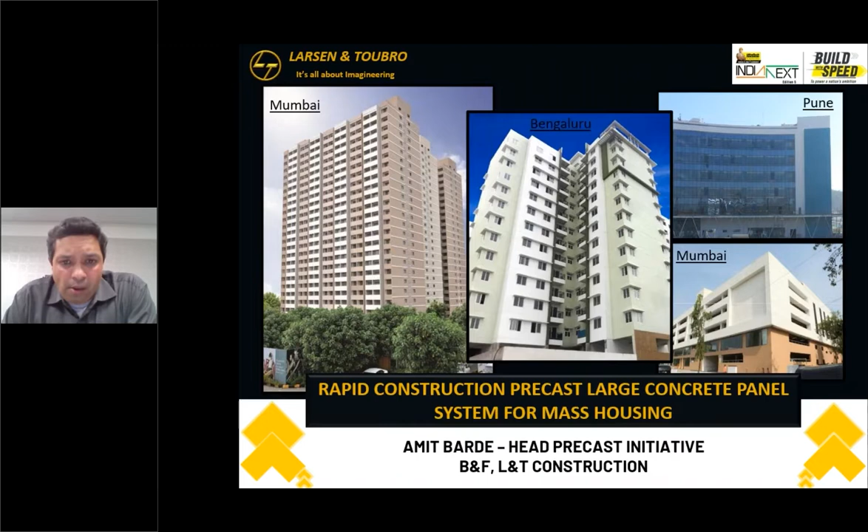Just a little bit about the company - all the numbers are there, I'm not going to spend time on that, but what we take pride in is being a professionally managed company and one of the most innovative companies. We call it Imagineering, not just engineering. There are various verticals amongst the company. I specifically come from the buildings and factories group, where the focus is on buildings, and more on residential construction.

Not a lot of people actually know L&T in the residential space. Usually it's all infra and huge projects, but we do a lot of residential work, usually the largest and the tallest, as the company's name suggests. A lot of projects you see, more than 250-300 meters, are going up in Mumbai in the residential space. For mass housing, if you see the project on your left, there are 6 tall buildings - it's like a city on its own. That's the kind of projects we're looking at. On the commercial and public space side, we have Statue of Unity, one of the recent projects, and the T2 airport was built in that commercial space.

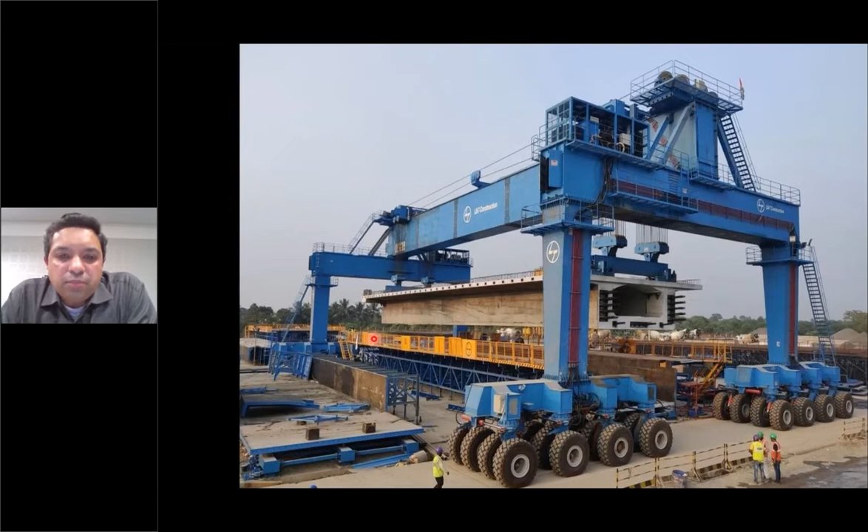If we come to precast specifically, the Narendra Modi Stadium at Motera was total precast, one of the very recent buildings in the precast space. And now we are building the high-speed railway - this is all going in precast. What you see in the picture is one of the most indigenous and unique systems where we are lifting 40-meter long girders for the high-speed railway. The entire assembly is automatically controlled between those four columns that you see with the wheels, and all built in India - none of that was coming from outside.

This is a Cognizant Technology building in Pune. This is one of the first buildings that we did in precast, around the 2011-12 timeframe.

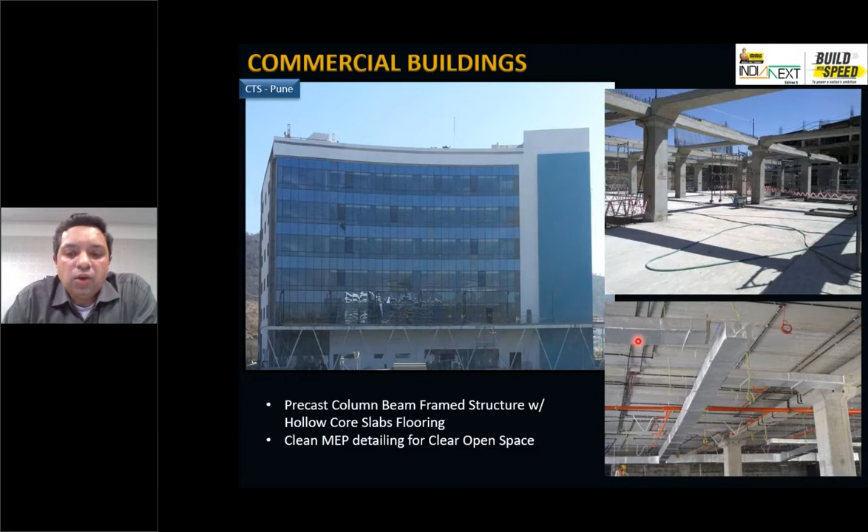Commercial building, total precast, columns and beams, and then hollow core, usually 8 to 10 meter grids. Usually in that hollow core system, a lot of questions come on MEP coordination. If you put in that time and do the coordination well during execution, we did not have a single complaint or query from the MEP contractor on this job. This was one of the first jobs.

This again is a project in Mumbai, the IKEA warehouse in Navi Mumbai. Hollow core slabs we've done before, but two unique things here: it's a hybrid structure with a steel frame, and the floors were put quickly using the hollow core system. It's somewhat difficult to gauge the size, but this is one of the deepest hollow core elements used in India's building sector - a 400 deep hollow core element, with a span of about 16 meters. The load is about warehouse load of 750 kg per square meter.

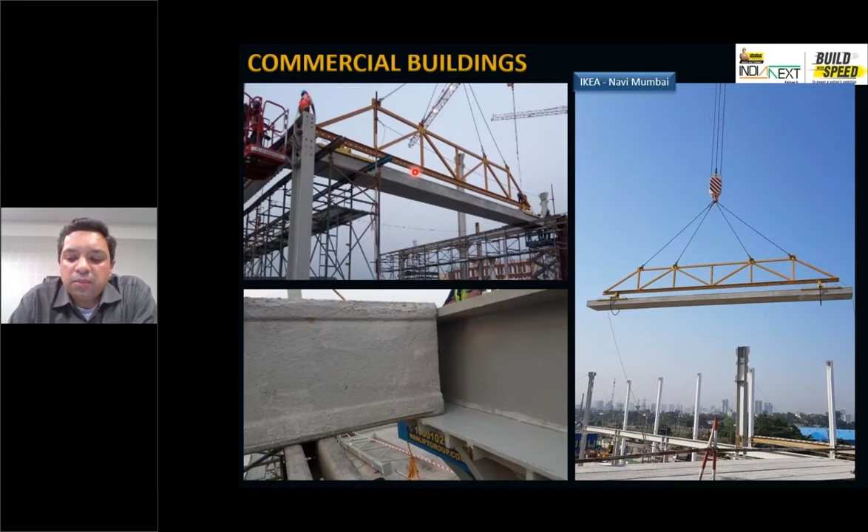So largest load and largest span for that hollow core. The biggest advantage: steel structure is ready, slab is put, no shoring from below, and then just the concreting is done to finish that floor - almost about 50% improvement in productivity. If you ever visit that store and walk on the showroom floor where all the furniture and rooms are set up, you are walking on those hollow core slabs.

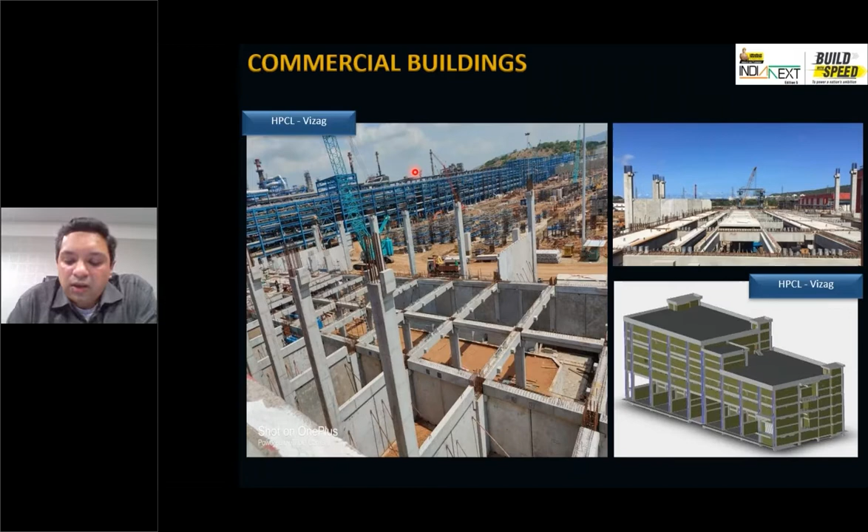This is one of the jobs now ongoing in Vizag, where we are doing a total precast substation for a refinery job. That substation is like the heart of that refinery. The refinery project itself is anywhere between 15,000 to 18,000 crore. The substation is a 35-40 crore structure, but without it the entire refinery cannot survive or operate. So we took the call to make it precast, again for that speed so they can start operating the refinery.

This is an office building in Hyderabad. When the building started, the architect had the vision of these C-shaped panels and bands, and this was conceived in block work. After starting the building, we took the call saying it's just too much block work to do plaster, and all these bands and the exterior facade were converted into a precast system.

Why I'm showing this is, even for your competition now, this is the theme we are saying: speed. Wherever that speed demand is, we are trying to make sure we move it to the factory, move it offsite, make it industrialized, and reduce site work as much as possible. So in all these key projects, at the heart of it, you're going to feel these 3-4 things, which are the need. I'm not doing precast just to push precast - this is coming from an inherent need of the company or the projects we do.

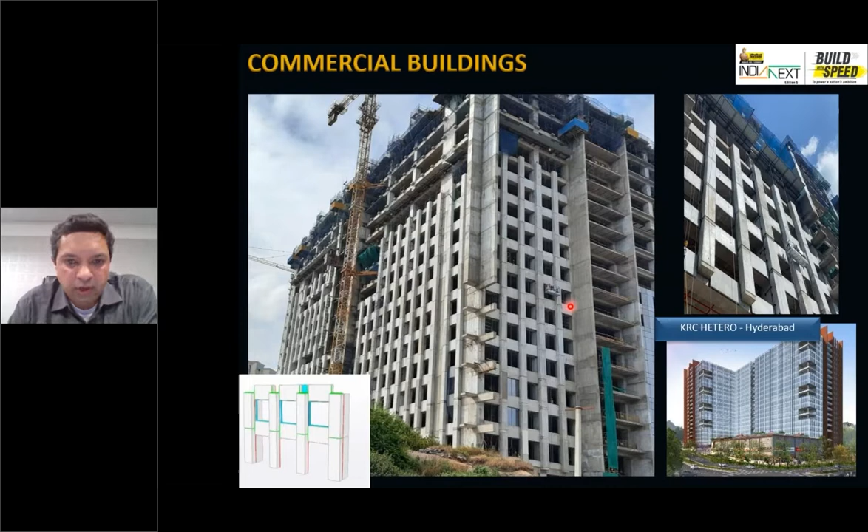Now this is a new proposal, not a working project, but what we call ultra rapid. Same building as your Hyderabad building but in Mumbai - now this is a 27-story tall building, and you have all this block work wall. It's right next to Powai Lake, so you get a lot of rain and everything, so doing block work is going to be a challenge. Even if you do really well with block work and plaster, there are just too many vulnerabilities to get leakage, or to get the work done faster.

So what we said is we will do precast panels, and we proposed welded connections. Usually my precast panel will take 2-3 days to finish - you erect the panel, do the jointing, do wet concreting.

Here with the welded connections, because I have a steel structure, the mock-up panel itself was attached to the structure in just under 30 minutes. That's the speed, that's the ultra rapid approach we are looking at - erected, connections welded, and ready for the sealant and finishing activity. That's the crux of why we are trying to look at these precast options.

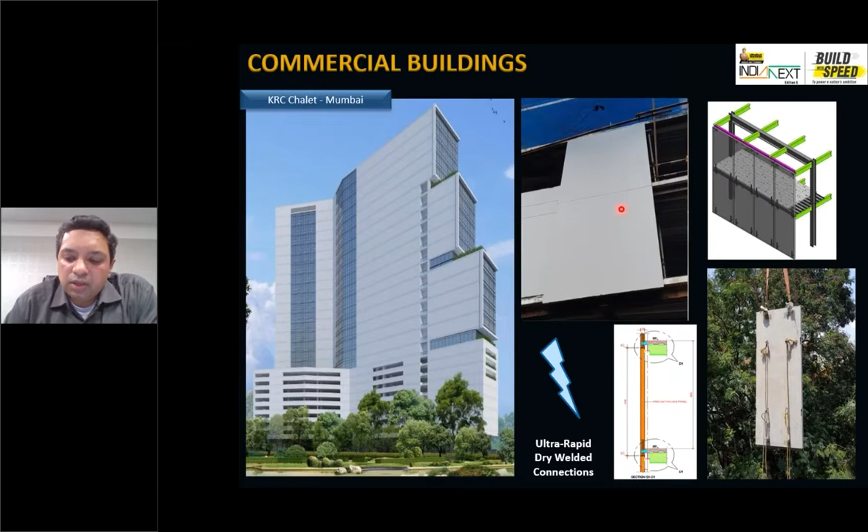Now coming back to residential, I think from this point onward pretty much everything will be discussed around residential, and more for the mass housing scope. Mass housing is not new to us - a lot of projects over the last 15-20 years. These are all conventional system projects, but why I wanted to put it is that's the experience under our belt to know what the residential client wants, to know what the residential construction beast is.

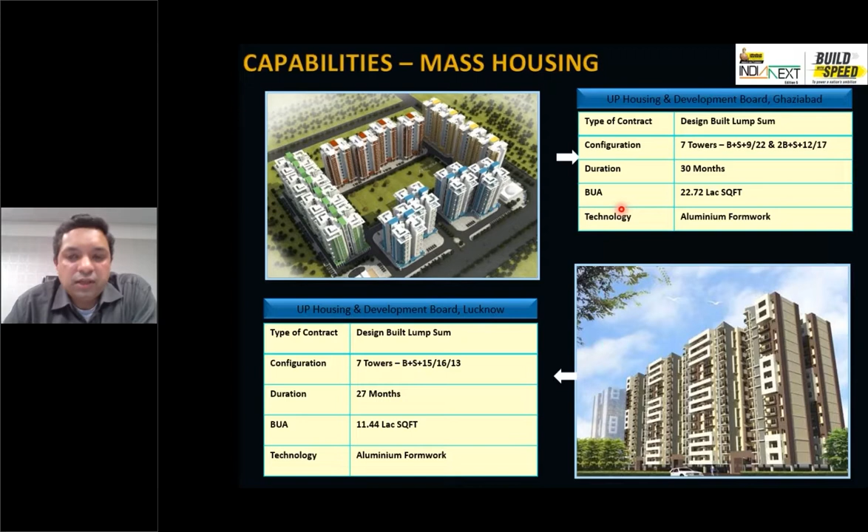Commercial is a very different construction system - there you are only dealing with one client. Here you have several flats, and each flat has probably 4 or 5 people living in it, if not 4, at least 3. So that many number of clients you are looking at. Government projects, private projects, a bunch of experience under our belt - high rise, mid rise, 20 buildings to even 100 buildings.

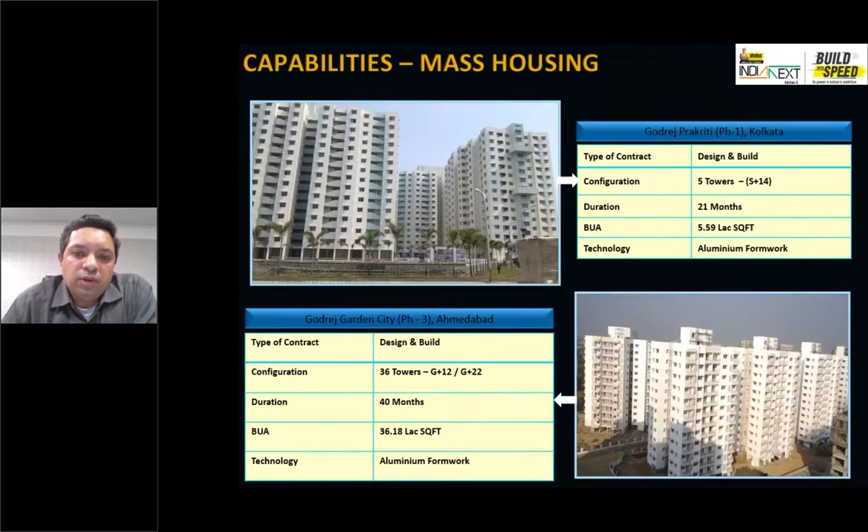There is a social connect, there is a social pride in that, so that's what they want - they want to have that pride. It's of course a long-term investment, they want it to be there - 50 years, why 50 years? We get the question of 80 years, 100 years, why not? So they want that to be there.

They want something low maintenance. They want something where electricity consumption will be less. There won't be any maintenance issues. They want something that is acceptable by everybody, where if need comes, they should be able to sell it off easily and get that return.

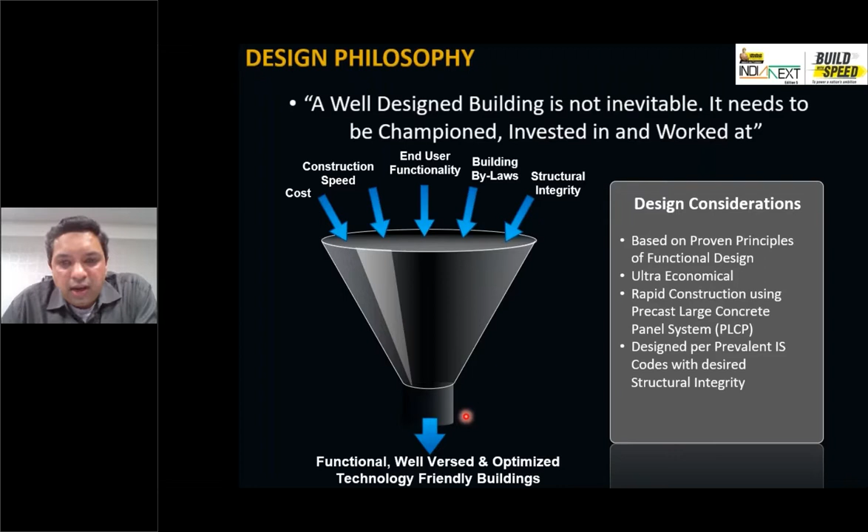It will be automatically accepted by your end user. And how you do it is not just one entity, right? It's not going to come that I do the structural design and your building is ready. You have to start from your foundation, your services, the coordination, where each pipe is going. This is where the beam comes into picture, saying my plinth beam levels are checked so my rainwater pipe is not going to hit it. These are minute things where over the years this was done as, for lack of a better word, jugaad - kuch to kar lenge and then we'll see. But we are not there, right? We want a functional design, we want everything right on the paper.

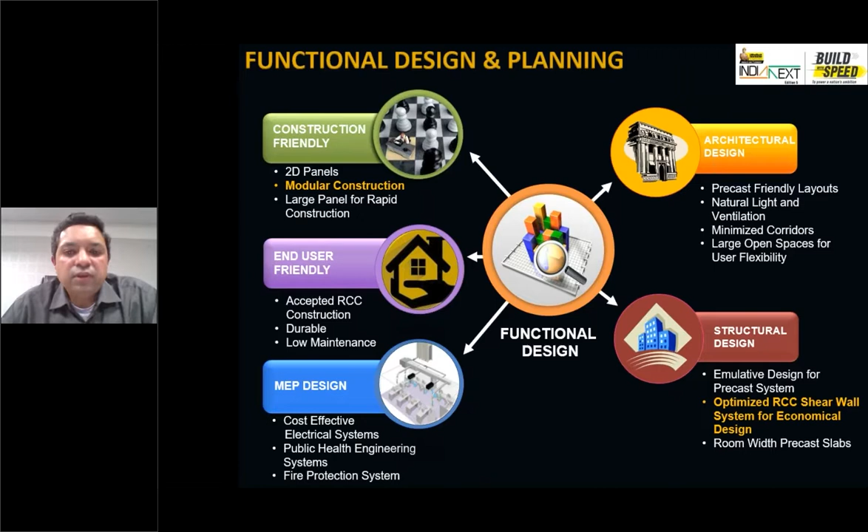Lastly, maybe the last 10 minutes, I'll spend on that ongoing project - it's one of the largest projects for the residential BU, more than 5,000 crore worth that we took up in precast for the CIDCO housing project. We are about a year into the project, so we're still building, we're still doing. I don't want to spend a lot of time there, but at least to give you a flavor, maybe next couple of months we can get into a lot more detail.

And then how we have adopted digitalization, that I mentioned in the start as well - this is how the technology is adopted and how we are using digitalization to make it even more effective, even more efficient. And lastly, maybe 2 minutes, I'm just going to say way forward where this precast technology could go, or what the outside world is doing, whether we'll be able to match it, do we really need it, why we need it, and how we go about it, right?

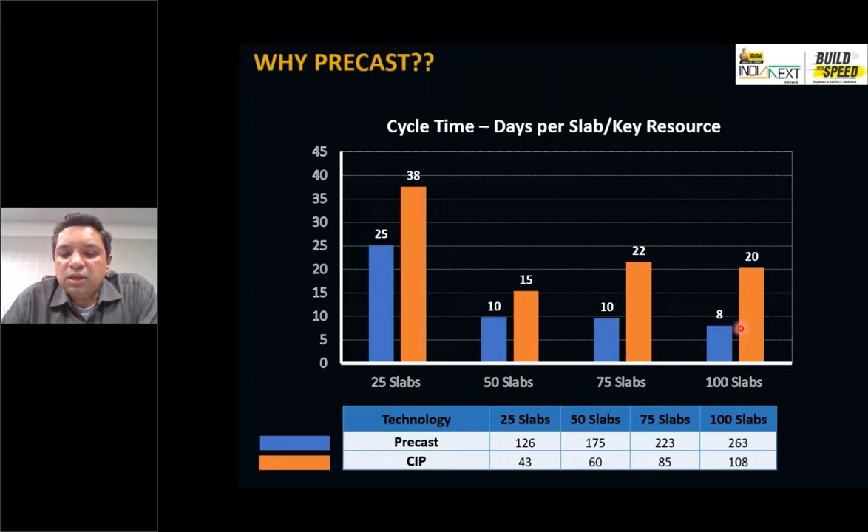The other thing, if I do the same project again, whatever we estimate - usually if you look at aluminum formwork, we want fewer people at site, fewer resources so that my risk is lesser. One of the biggest risks in construction today, especially residential, is having your workforce at site. If you remember, when COVID waves hit, the biggest challenge was getting people back - even media was talking about it. So if I have fewer people doing that same work, my risks are less.

The challenges are less. If you look at that entire activity in aluminum formwork, per cubic meter of concrete, I need about 5.5 man days. So assume I need 5 people there.

For the same thing in precast - both conventional precast and automatic precast - this is what we are doing now. We can even go to fully automatic, what the global industry usually does, and it will improve even further. But I've kept it at where India is right now, what we are doing at best. I'm looking at 2.5 man days, so it's about half. But that's not the real story - out of these 2.5 man days, I need about 1 for production and only 1.5 at site.

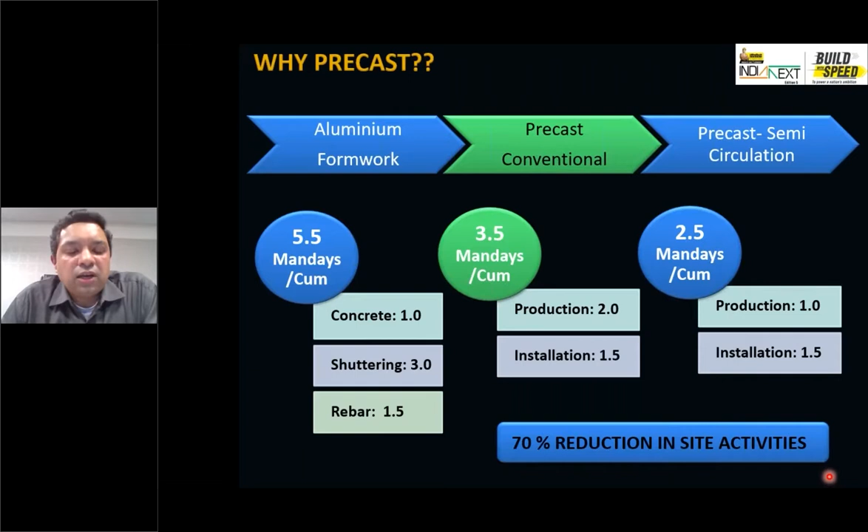If you compare site activities for precast and conventional construction, there's about a 70% reduction in site requirement of people. This is where I'm covering my risk—I don't have to worry as much about having the workforce at site. Workforce at factory is a very different ball game. We have a much higher retention ratio at factory because they're working in a controlled environment, at ground level, covered shed. Whoever is there, they always stay.

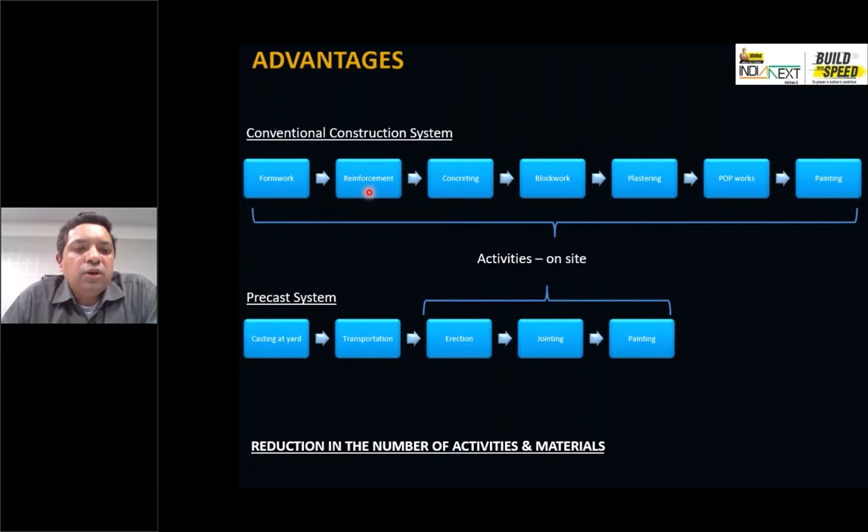In a nutshell, at site with conventional construction, if you look at what these 5 or 3 people are doing, they build the formwork, put the reinforcement, do concreting, block work, plastering, POP, painting. Since we took up the aluminum formwork system, we've completely avoided that work—this is where you need maximum workforce, the block work, plastering, leveling and everything. So instead we are doing this shear wall system using aluminum. Even forgetting precast for now, aluminum became popular because these activities were removed. I'll talk about that more later.

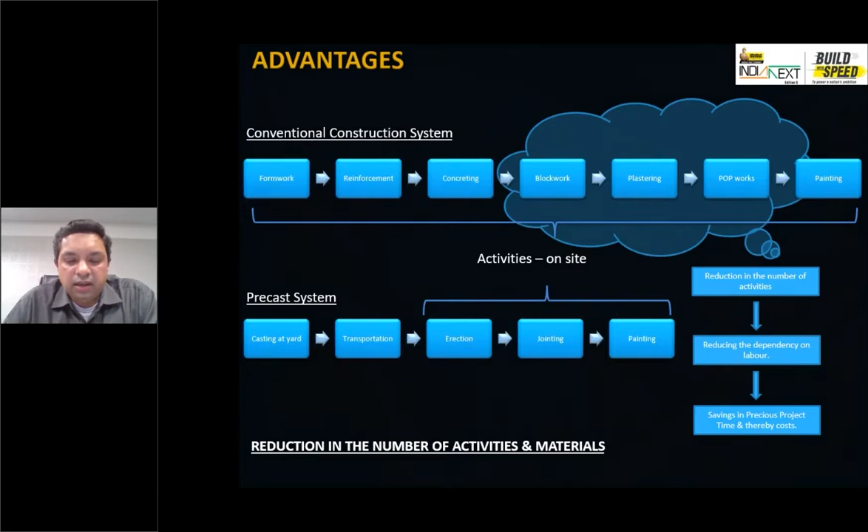Now in precast, this still takes a lot of time—that 5.5 people per cubic meter we're talking about—but we're taking it off site and doing everything in the factory, finishing it there, then bringing it to install. That's the idea, and where we'll adopt it is projects like this.

This is our AP housing project, 1 lakh houses straight. Same buildings—this is basically what the housing demand is. We keep talking about 12 crore houses everywhere, but here's a single project in nearby 3-4 plots with demand for 1 lakh similar houses, ground plus 4-story tall buildings. How do we solve that challenge?

We just look outside, at our neighbors. We are not the first to go through this challenge of social or mass housing. Singapore has done it, Shanghai has done it, Tokyo has done it, Hong Kong has done it—all these countries have done it. These are our neighbors with similar setups, similar situations. How long did they take? About 20-25 years, and we are looking at doing it in 7, 10, maybe 15 years—a drastically smaller time period. This is where speed comes into picture.

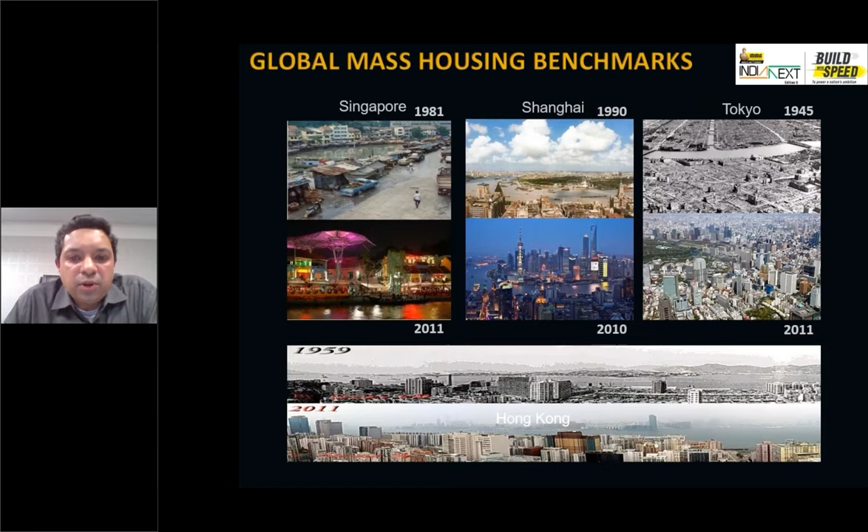How will the speed come? Using technology. Have we not adopted technology? In all other construction aspects we have, right? I am from Mumbai. If you're in Mumbai today, we are building the metro all over Mumbai, the coastal road, the Trans Harbour link connecting Navi Mumbai to Mumbai, the high-speed railway—some of the latest and greatest projects using the greatest technologies globally are operating in Mumbai at the same time, they cannot get better than that. But still, if you come to residential construction, we are lagging.

We have to do something, and this is what we are doing. What our neighbors are doing, the only answer that comes for all these countries, is industrialization and mechanization. Is anybody now stitching their own shirts? No, we are not stitching our own shirts, we are not stitching our own shoes. There are factory made products in that range, and we are very well adapted to do that.

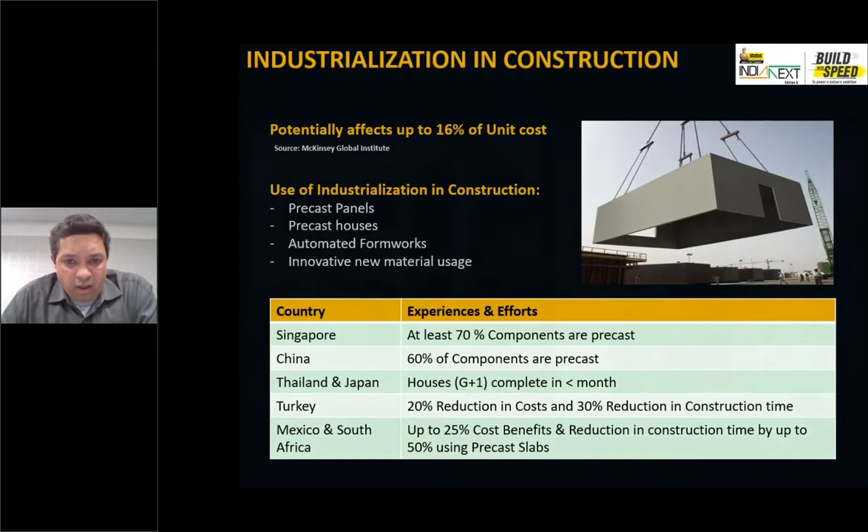This is where residential construction has to go. There are set standards, set standard units, especially for mass housing, where we are looking at large volumes for whatever functional requirement, and you put it in the factory, make it like a car, make it like a shirt, and then construct. That is one of the biggest driving points. If nothing else about technology, if you want to take one thing home today, it's industrialization and mechanization—that's how we get speed, that's how we get the answer to our solution.

If the slab is done, your developer says, okay, slab is done, now give me my money, but the building is only done 50%, and that's the industry norm. But block by block, you have to set it up, do plaster. We don't have people anymore to do this work, right?

We keep discussing with various people, and one thing that stuck with me is, if you see 2006 in India, your mason's son did not want to be a mason. He wanted to do something else, maybe technology, another job, but not construction. In 2022 now, even the mason doesn't want his son to be a mason. That's where we are, and that's great.

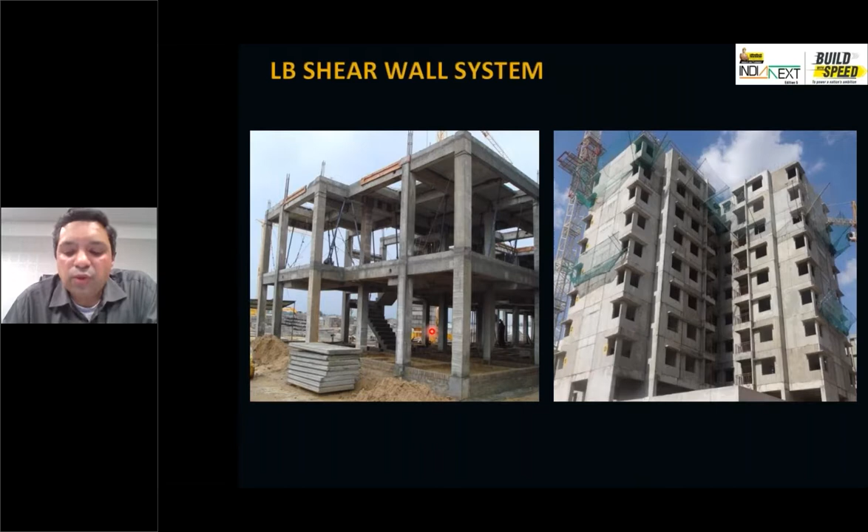India is shining. We are going forward. The society is improving. Our quality of standard is improving. Our quality of life is improving. But for construction, I don't have people to do the work that we had earlier, and that's where we are leaning towards this technology. So the second point I'd like you to take home is, we don't have a skilled workforce anymore. Whoever is there doesn't want to be in construction, so very limited people are available.

And the third and last point is the maintenance, what your people or end users want. One of the biggest maintenance items in residential construction today is plaster, internal or external. Plaster was never meant to be a long-lasting product. It cannot be, it's a sand cement mortar mixture. It absorbs water, and over time it cracks, and the paint fades because of this water absorption issue.

So the technologies we are evaluating or trying to adopt, not just precast, any technology, we are avoiding plaster. That call was taken around 2002, when aluminum formwork became popular, especially in high-rise construction. I don't want to go outside, put up scaffolding to finish the building. I will pour concrete, even if it costs slightly more, because the net tangible benefits are much higher compared to the upfront cost.

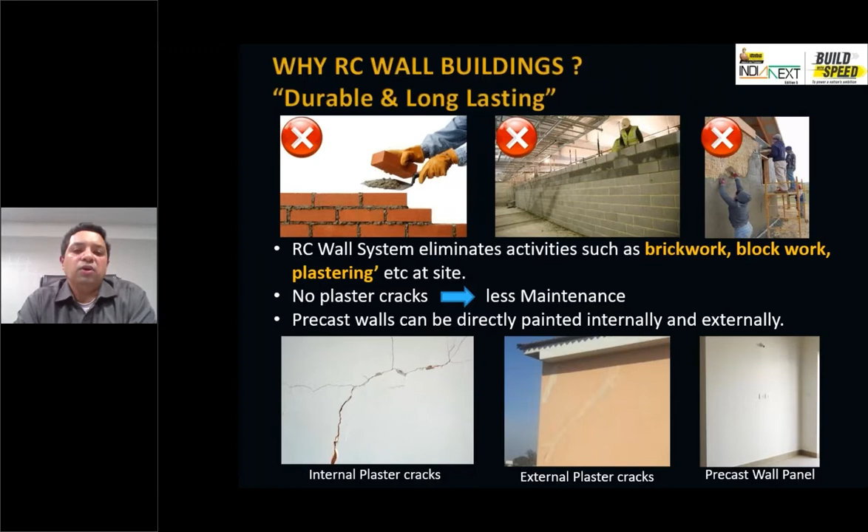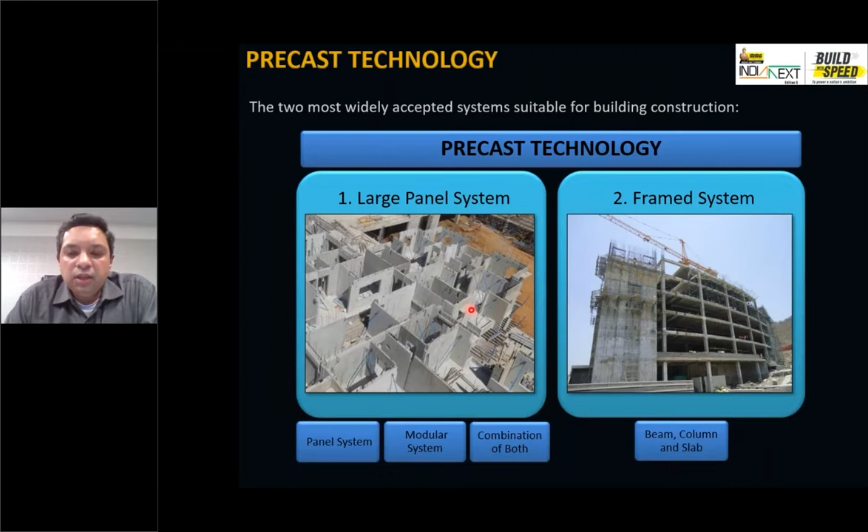What we are doing in general - let's look at residential construction now. I'm going to take the floor plan we have. We are not there yet where floor plans are being built for precast. If you see the outside world, a lot of architects will be here - going forward, I hope the design industry shifts towards knowing the technology they are going to build before they start the drawing board, and the floor plans are built suitable for the technology.

Here in India, we may or may not go there, but our end user has requirements - we need in and out layouts, we don't have boxy buildings. I don't see residential buildings being boxy. So what we have done is work around it, saying my floor plans are going to be in and out, they are going to have complicated shapes. I work with those shapes and try to make as much as possible 2D panels and convert them into my precast systems. That is the work I have to do to make sure you get that performance out of it. Once you do that, all we are doing is the layout is ready, make these elements in the factory, put it on site, erect it by crane. It is not rocket science, trust me.

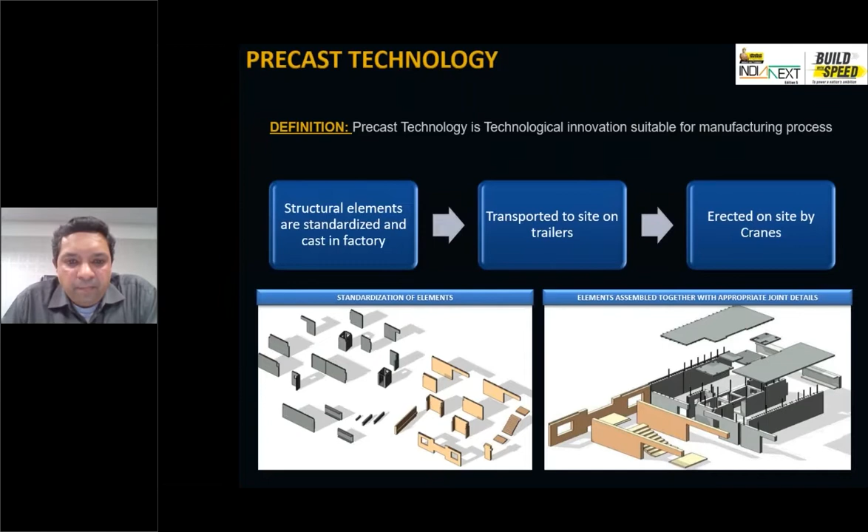It is equivalent to your beam column system, right? Not all walls are shear walls in the system.

Now once we pass this, in precast what we are doing is the next step of your aluminum formwork system, nothing else. Exact same system, same building - only thing is I split the panels and make it in factory.

How do we connect it? We are using this emulative approach. We can't get into too many details, but just focus on the word emulative. What that means is if you use this emulative detailing, your precast building is going to behave equivalent to your conventional building, that is aluminum formwork.

This is from American Concrete Institute. They have specific standards for emulative detailing. They will tell you exactly what to do. If you do that kind of detailing, the wet construction connections, you get equivalent performance.

There is a Precast Concrete Institute again in US. They take even a further step. They said that if you do this emulative detailing, regardless of seismic region, you will get performance equivalent to that cast in place system. And this is what we are doing.

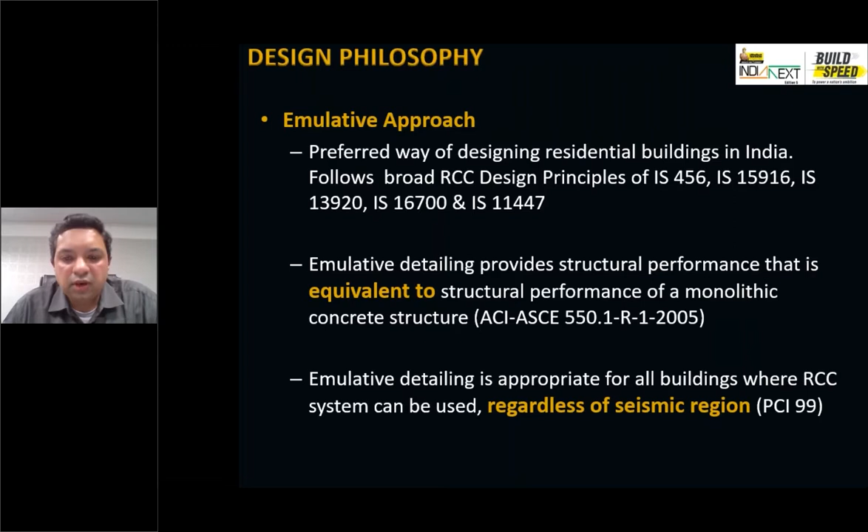There are various reasons, but if you want to see that emulative performance - we also were getting that question a lot - so what we did is we ran a full-scale test program in 2016 timeframe, saying this is how I'm going to do emulative detailing, and I'm going to validate if it gives me equivalent performance. That word equivalent is important.

I don't want better performance, I don't want superior performance, because all our design codes are currently built around RCC system. So I just want to make sure that I build one specimen in conventional system.

These are my two shear walls, foundation if you want to imagine, and a slab on top of it. This is a full 3-meter high tall wall, and we are validating the seismic performance. So this is done in SERC Chennai lab.

This was one of the very few labs at that time which has this seismic actuator, which kind of pushes the building and pulls it in a controlled manner, so we can study it in detail and see how the system is performing. So this cast in place specimen was prepared, and then the precast specimen was prepared using the joints.

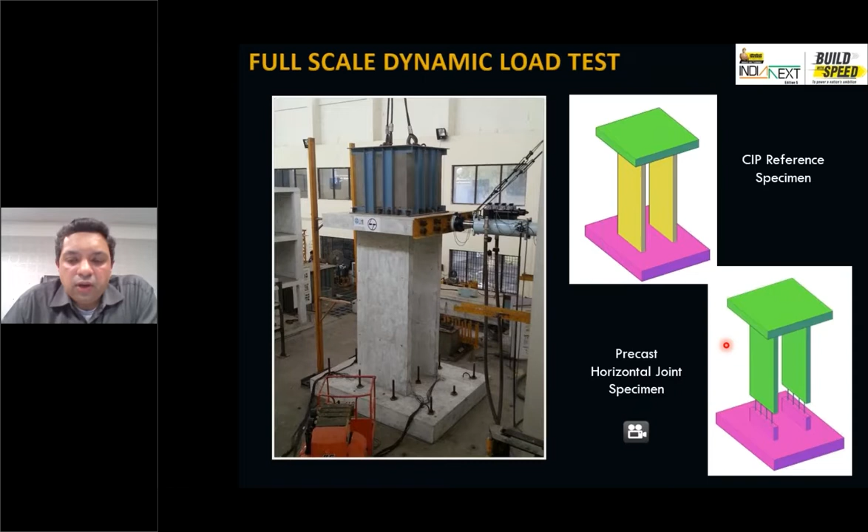Idea is, like I said, we want to see if they're performing similar. We don't care really at what level. So these precast joints were emulated, and then you look at your force versus displacement curves.

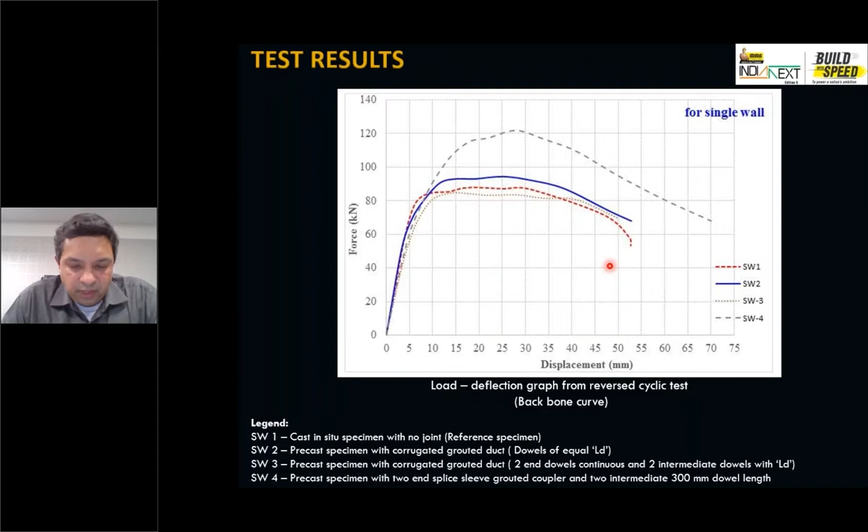That's why in engineering term, that's how my toughness is going to be calculated. The area under the curve is going to be your E values, or your R values - equivalent performance, or the ductility, what we call it, we're looking for.

So again, this in precast and conventional has to behave similar, then we get equivalent performance. Usually I get that saying, okay see, your equivalent performance is not there, cast in place wall is so higher. But if you really look at that, SW1 is my cast in place wall - this is that CIP reference specimen - and these two are my precast specimens, and these are behaving similar.

This is what we want. If you calculate that area under that curve, you are going to get similar performance.

This is actually one of the precast connections that works better than your lab connection. That's how you see the higher values. All these walls were designed for same design capacity.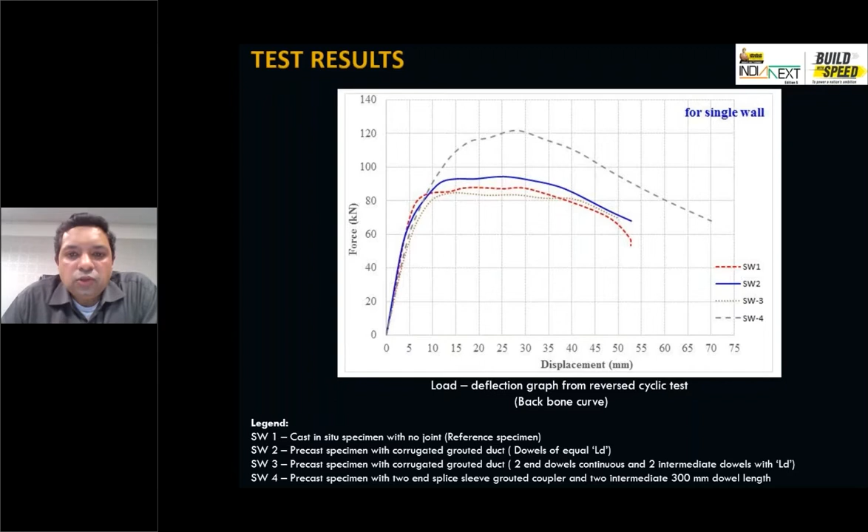So this is the grouted couplers what we are using now. I think after 6-7 years of following up and making it available in India. But these are confined couplers, high strength grout. They use M100 grout, and that's how you get slightly better performance out of that.

Now, at that time we didn't have any testing in India, so we went to Hong Kong and got this tested for the cyclic performance. That's where that seismic detailing is important.

So if you want to look at it in one summary, this is reverse cyclic test. If this is your zero, it is pulling and then pushing to 50%, 95% of tension to 50% compression, so you get that cyclic behavior. They have 20 cycles, then they pull it to twice the yield and do 4 cycles. They pull it to 5 times yield and do 4 cycles, and then they pull it to failure.

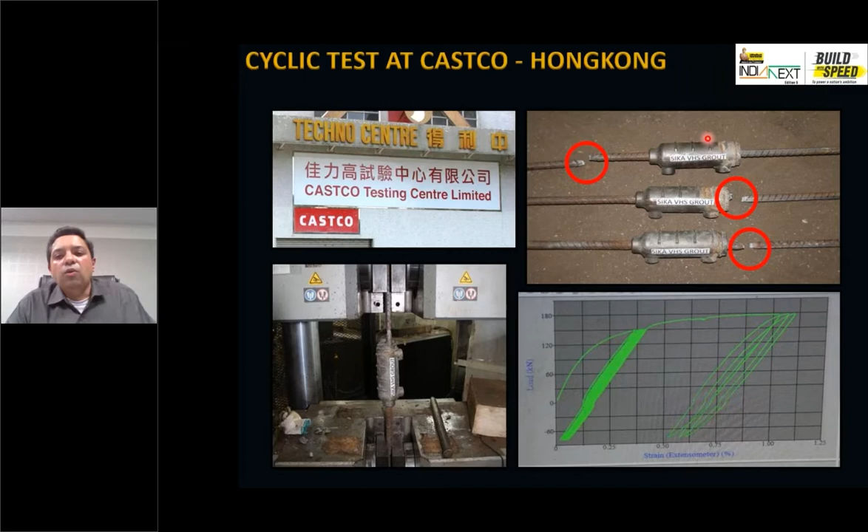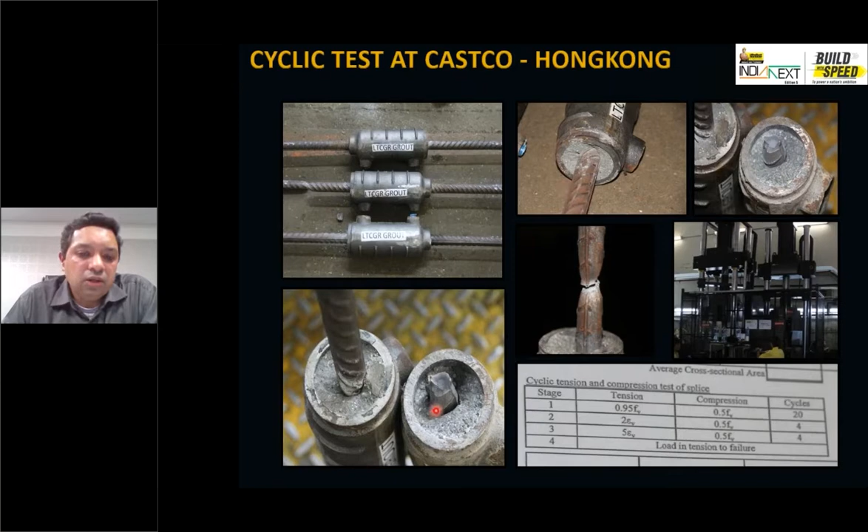After that, the test says your failure has to be in steel, that's where you get the ductility, not in the brittle portion where the grouted connection is done. This is the key validation for how you get ductility in precast systems. All these connections show beautiful yielded curves, where the steel is yielding, giving you the failure indication warning you learned in school. It cannot be a sudden failure, so the yielding gives enough warning before it fails. The grout does not fail, so your system is ductile.

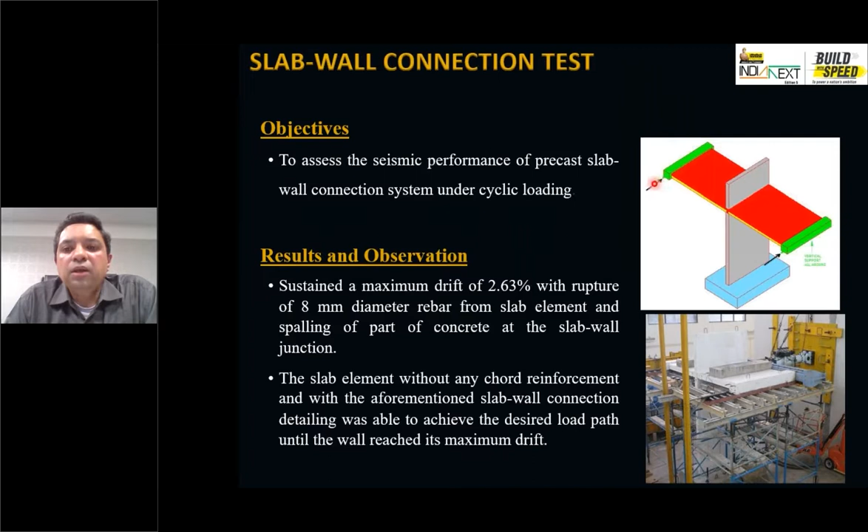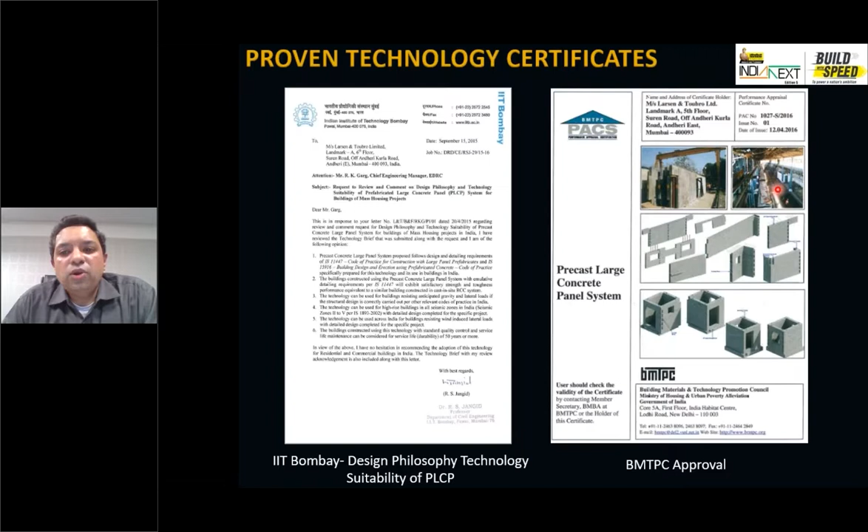Same way we've done other systems where we check slab and wall full scale testing, looking at the load path and whether the diaphragm action is working. Then we looked at the vertical connections and how the performance is going. So that entire connections portfolio is validated. Once that emulative detailing is done, you get similar performance because your concrete elements are much better, like using at least M50 grade concrete for early strength. So that element is superior to conventional systems, and your joints are validated.

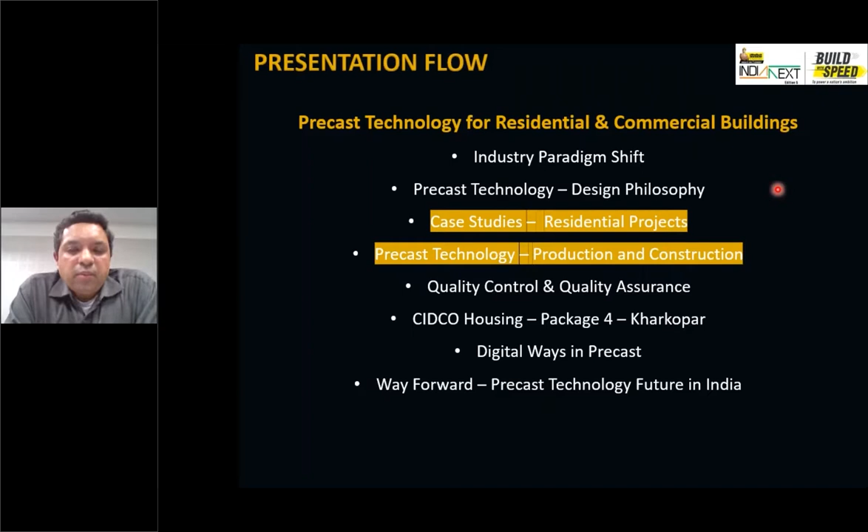On those lines, we now have several approvals in place from all leading institutes. IIT Madras is usually our peer review agency for all precast projects. IIT Bombay has also given that certification, including the government agency BMTPC, which has certified it for government projects. So that's quickly the design philosophy and how we evaluated the technology, making sure all the requirements are with us.

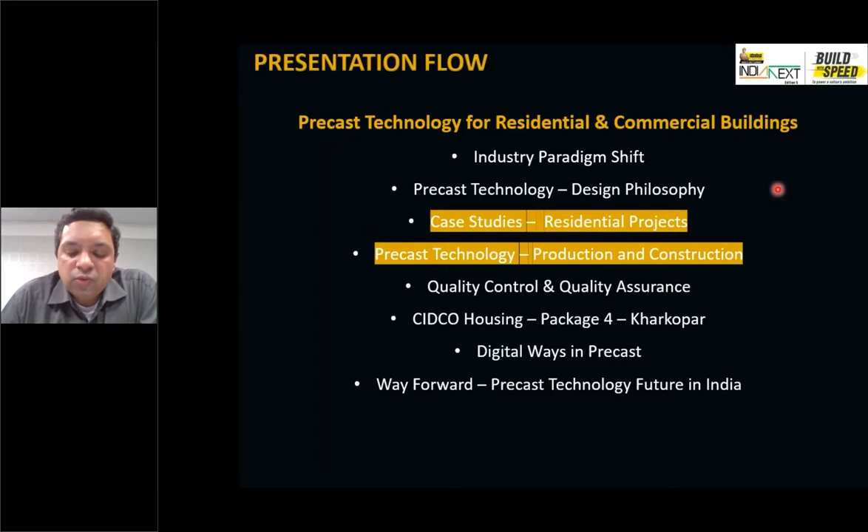All these test programs were not really needed, this has been done outside before. Of course we did it slightly differently, the reverse cyclic way, which is not even done outside. But we wanted that validation, we wanted to make sure nothing would get questioned tomorrow and that entire portfolio is ready. That gave us the confidence to go and tender for a 5,000 crore project with this technology. You cannot go for that large a project on a whim, the management also would not allow that. So these are the requirements needed to go through that.

Now, how the technology is built and constructed, maybe 10 minutes, and then I think by 8:10 or so I should be wrapping it up.

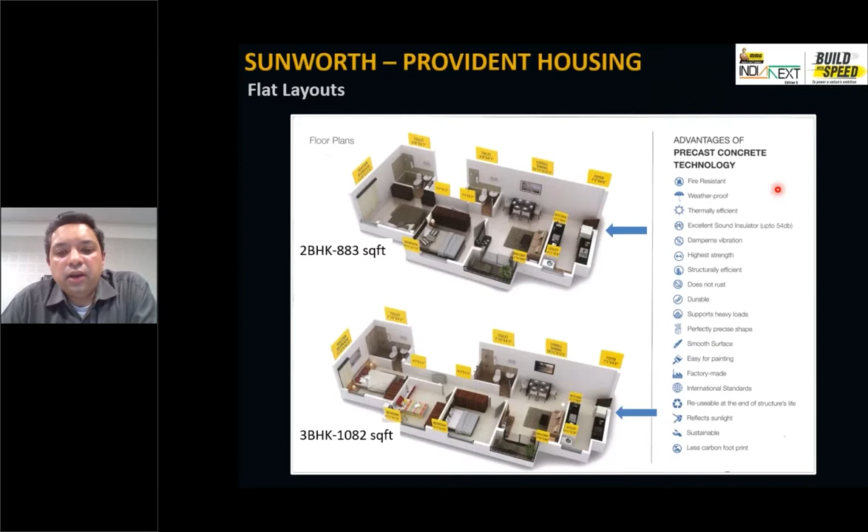This is that same project, Provident Bangalore, 66 towers, 2 phases completed. Very typical flats, about 800 carpet, 1080 carpet, whatever layouts the client already had, we did not change anything in those layouts. Finished project, some more pictures if you want to go through it. But everywhere you see detailing, the focus is making sure you get that similar finish. All the joints and details, whatever is there, we detail it out, we sit with the architects, and we make sure only I know what the differences are, but a layman would not feel the difference.

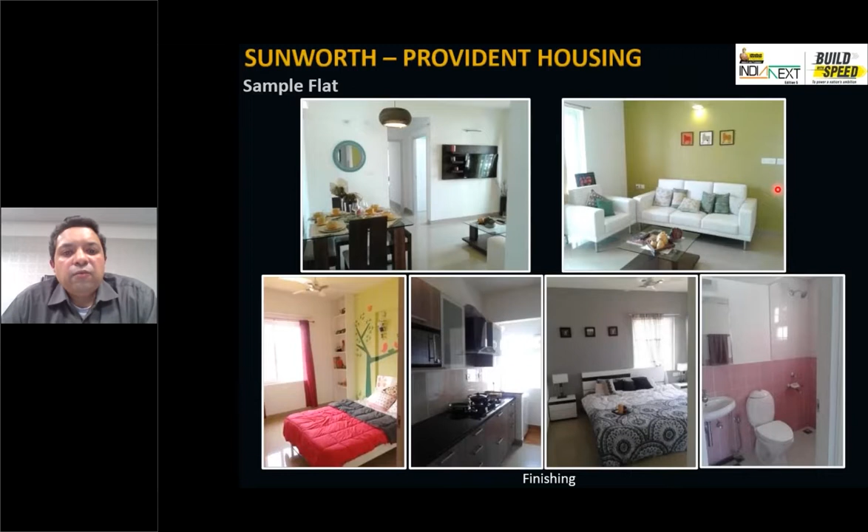We even made a sample flat using the same precast systems so that they get to see the feel of the technology. This is one of the finished flats from interior. Once it's finished, even our own engineers would not know where the joints are. That's the kind of attention to detailing done to make it finished.

Now towards the technology, if you see any global factory, where I worked 10 years in the US, first class fine factories, all enclosed sheds, and even air conditioned factories in a couple of locations. Compared to that, this is my Bangalore factory, which is open, because there's always cost pressure. The way our infrastructure is, we cannot afford to transport these panels from a centralized factory for that volume, we don't have that kind of road network or bandwidth to ship 150 elements every day.

So what we do is set up the factory at the site, a temporary factory. The project is 4 years, and at the end of 4 years we wrap up that factory. We don't even use it for the new project, or at least that's how the philosophy was earlier. So that's why you see a very minimalistic factory. Bangalore doesn't rain like Mumbai, where it was raining until January last year, so I don't need the shade, I'll save on that. But except for the shade, all other quality measures and quality control we operate are exactly similar to what you'd use in a controlled factory environment. That's the philosophy.

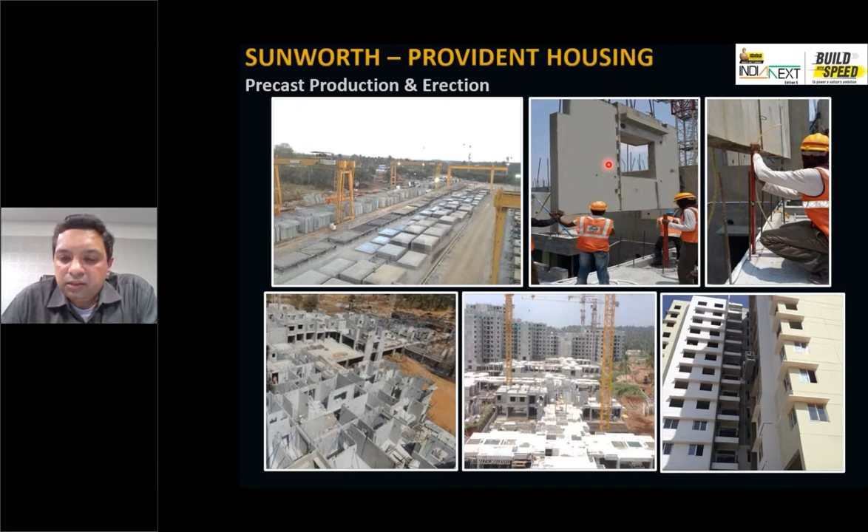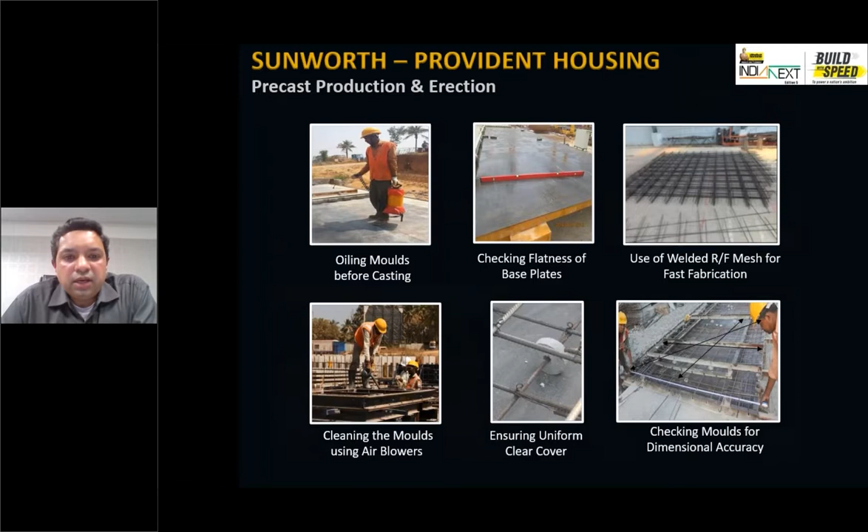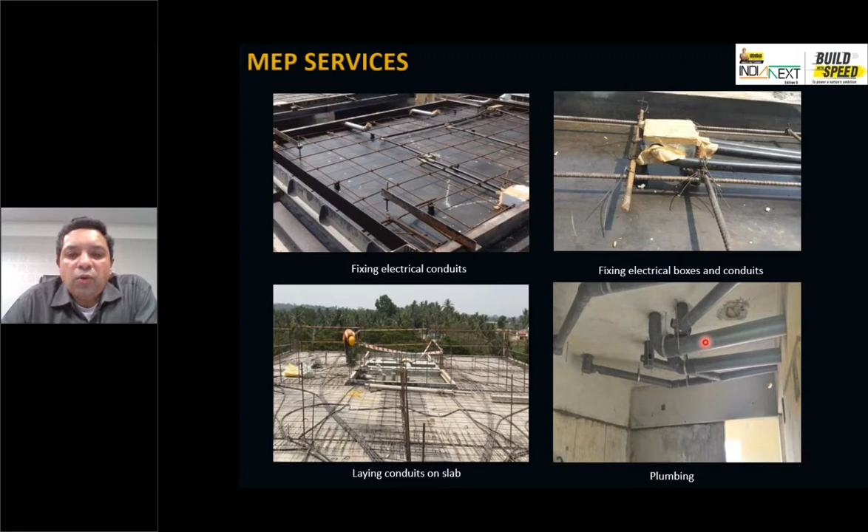Usually, if you see, electrical embeds are concealed. MEP pipes and all we do undersunk preferably. If not, we can do the conventional sunk also. But what we do for pipes usually is we leave the chases so that there is some access, because conduits you don't need that, but pipes, no matter what you do, there are joints, they may leak. So you can't jackhammer an M50 concrete, so we leave that, patch it back, and work that out. So this is how the chases are made in the panel so that they're shipped out.

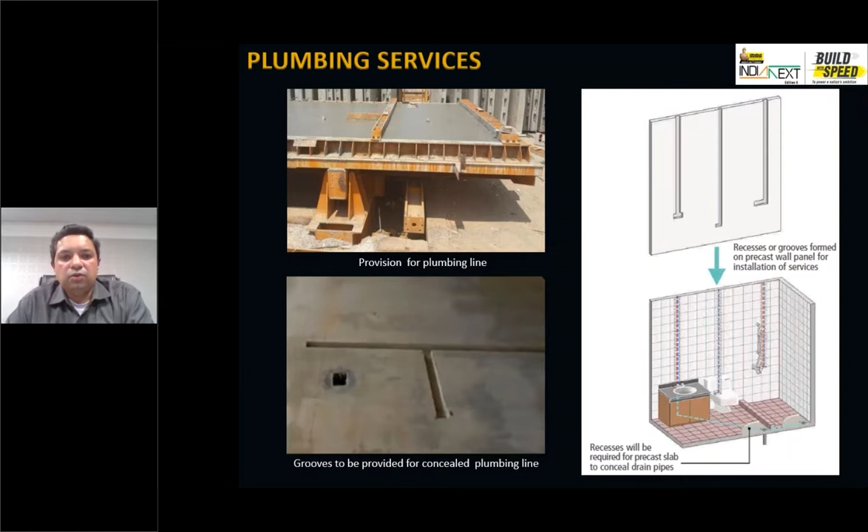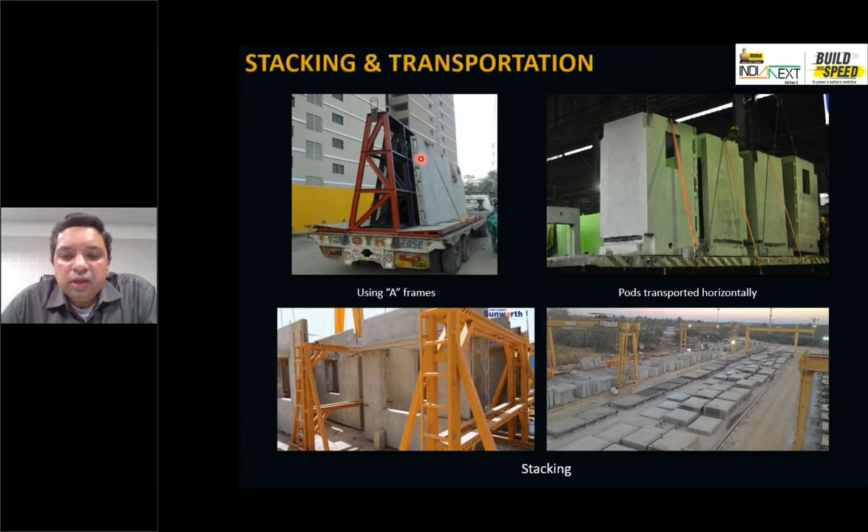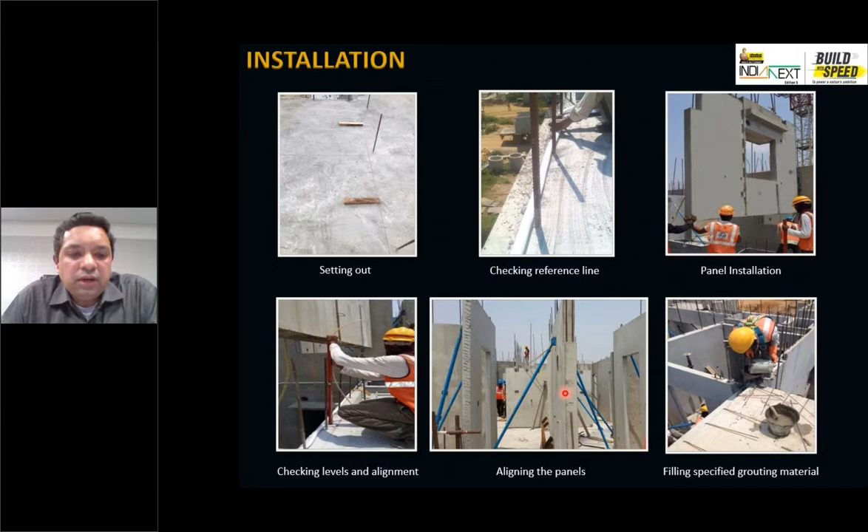Transportation, because my factory is right at the site, I don't have to worry a lot about it. We have now standardized norms, the A-frame, V-frame, trailer loads, and a very well established system to do the transportation. Again, comes back to site. There are very set guidelines established. They know what to measure, they know how to do the leveling. We have the push-pull props to make the levels after it's erected. Once they do that, everything automatically is going to fit in its place.

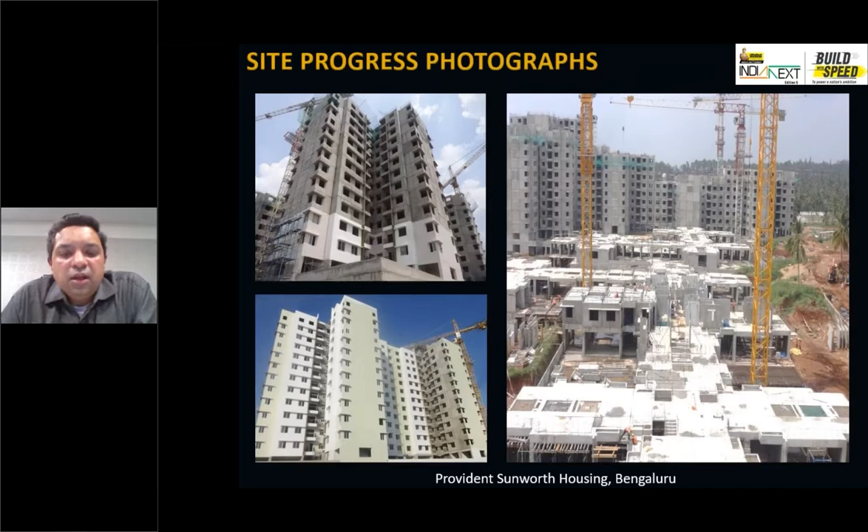Yeah, I think some of the same pictures again at a larger scale. But yeah, this is how that project, I think the architect had conceived the project in 2014, and this is how we finished it and handed it over in 2017-18 time.

So that's that. One other thing in residential now that we are exploring is that I don't have to do the entire building, right? Again, I am catering to my site's demands, what they want in terms of speed and finishing. So if you look at a typical residential unit and you ask your construction manager what are your biggest issues after the building is done - if you see 15 years ago, we were doing a typical building in about 8-9, maybe 10 months, and then finishing about 6 months. Now suddenly we have brought these new technologies, and instead of 10-11 months, I am finishing the structure in 6 months, but finishing is still 6 months, right?

So now finishing is under pressure. So then if you ask him, he'll say that living room, bedrooms, I don't care, but my kitchens and my toilets take the most time because most activities are there. And then it's a very small space usually, so I cannot have 3 agencies working at the same time. It's one by one. So then we said what we will do is we will look at finishing those in the factory.

So what you see in the picture is a 10-ton element which is finished. These photos are the finished photos of the inside of this unit. So everything was done in the factory - finishing, waterproofing, coordination, everything done in the factory. And then the pod just kept before the slab is to be poured, and then we did the construction. When everything was finished, they came back and they only replaced the door because it needed protection.

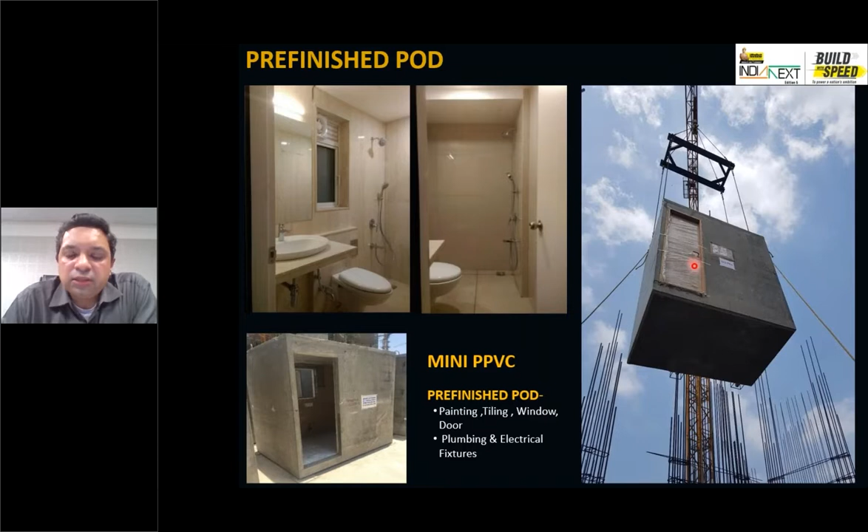So they replaced the door and everything inside is ready. This is the factory, right next to the tower. This was an experimental smaller thing. The way we planned it, it was picked up right from here using the tower crane. So you are casting it here with all indigenous molds, you finish it, lift it up directly and put it at the site. This is a typical mold.

Again, this is not child labor - this is my son. I took him on a Sunday to visit, and he was so excited about this. He's still talking about it a year down the line, saying those were the finished bathrooms. This is how we want the younger generation excited about the technology. He still talks about it, thinking why can't we put finished rooms? I think hopefully in a couple of years we'll do that too.

So with that, now we come to our quality control, what we are doing in quality control. For precast, usually quality control means how are you controlling your leakage. I'm going to be very upfront about it - this is how we are controlling the leakages.

Are we the first ones? No. If you see the picture, this was a building built in Mumbai in 1972 - that's about 50 years now. I think the slide says 43, it's an older slide, but it's about 50 years now. Shirish Patel and Associates built this building. Up until 2016, we used to roam around saying we have built the tallest building, ground plus 23 story, and then we came across this building. Since then, we've stopped saying that.

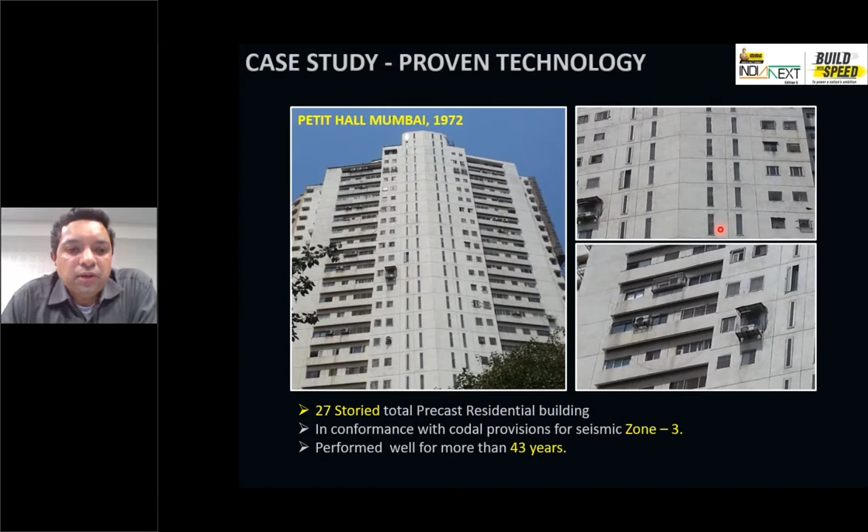Total precast building, each flat is probably upwards of 15-20 crores now. People are living in it, the building is functioning. They have maintenance issues, some joints are leaking, this and that, but the building is occupied, they're doing it, and the owners don't have any significant complaints about it. So this is where that durability, the joints, there is a live example in front of us.

This is how we have evolved in terms of joints over the year. This is our Mumbai building, the ground plus 23 story building, some of the initial floors. Because it was the first building then, and this was one of the biggest flat elevations which would get the most rain, we said we will just physically cover it. So if you look at this joint, there is literally a physical band which covers the joint, so water cannot go up. But some architects like it, some don't. Most people, after the buildings were finished, thought of it as an architectural treatment, but it was really done to hide the joints. From an erection standpoint also, if the panel swings and all, a lot of times they get damaged - we don't have that kind of control, so our guys also don't like it.

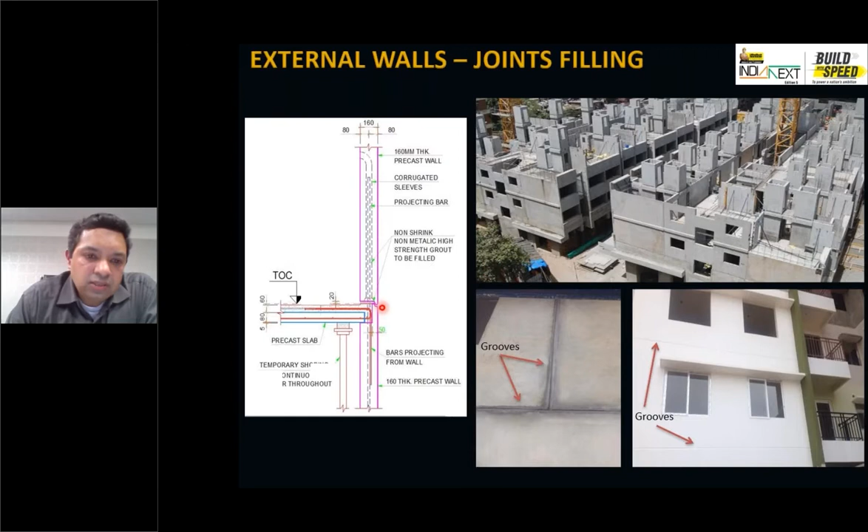So what we did in the next job is we built that inside the panel. We stepped it up, and in the Provident Bangalore job, we have done that inside - so outside it looks flat, but inside this detailing is there. This is where, if you're looking at competition or improving the technology, everything lies in making sure your joint is covered and controlled.

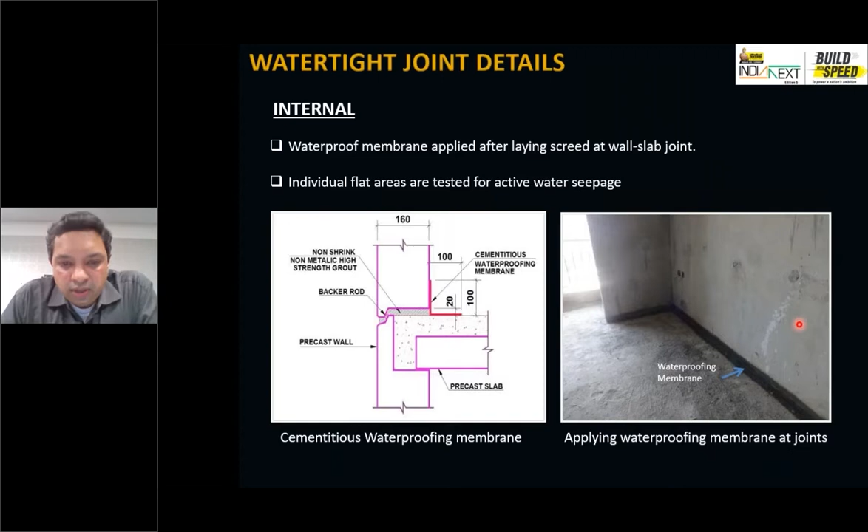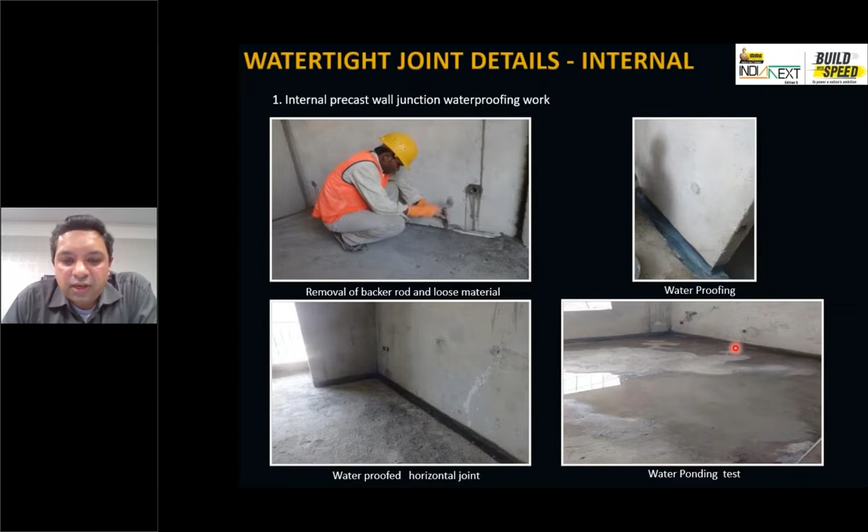So there is a step, there is a non-shrink, non-metallic high strength grout, there is additional waterproofing that we are doing everywhere. The philosophy is water should not go from one room to another - forget the flat, we treat all rooms making sure it doesn't go through. After we treat it, we make sure they actually behave like a water tank - we are literally building water tanks now. So we flood the flats and pond water, making sure that after 4 hours it is taken out.

But how are the lower flats doing? How are we seeing the leakages and all? Do we not get any leakage? We do, because it is not a water tank - we're trying to build it like one, but it's a residential unit. So there are areas, spots, some areas where we get seepages. But from 2012 to 2022 now, if I have to put my experience, a lot of times I call myself a structural engineer, but forget it, I'm a waterproofing engineer.

If I had a leakage problem in the 2012-14 time frame, today I have only a seepage problem. There's a big difference. Leakage is where you used to see drops. Right now, whatever detailing we're doing, we see some seepage spots which also dry. We have to treat those, but I don't have dripping water issues. There's no water, only moisture. That's where we stand today.

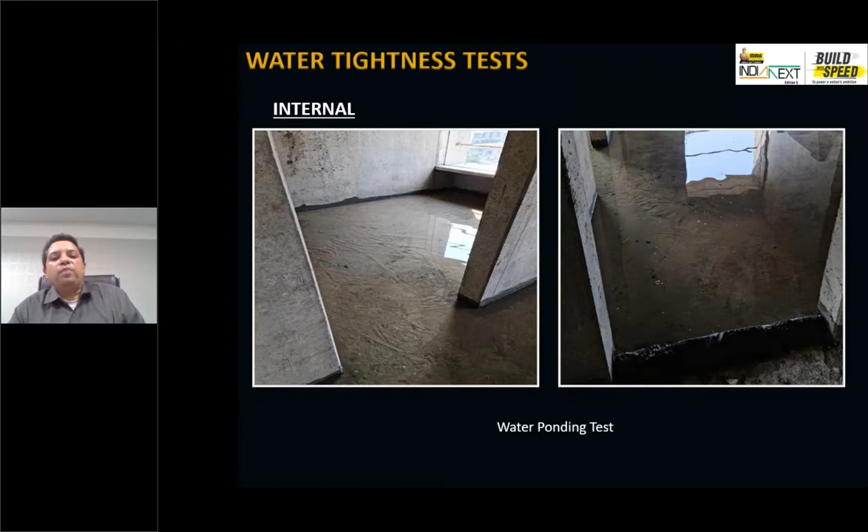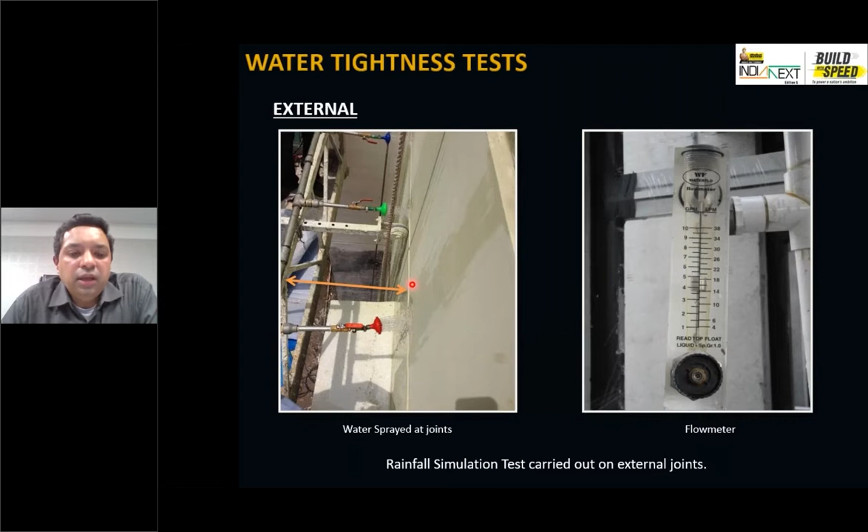For the external joints also, we are actually looking at an actual sprinkler test. There are codes now specifying what the water discharge rate should be, how we simulate the rain. We adopted this at that time using Singapore detailing, but now it's in IS codes also. So all that is looked at, and then we are scoring our own buildings.

That's how the quality control or quality benchmark we are establishing for precast buildings. If you're familiar with the Singapore system, there is CONQUAS. We call it the Precast Building Quality Assurance System, PBQAS. We scored the Provident building. We have our own set of data now, so I know for each building what score it has. It's not 100 everywhere - some has 84, with scores for structural, architectural, all those details are there.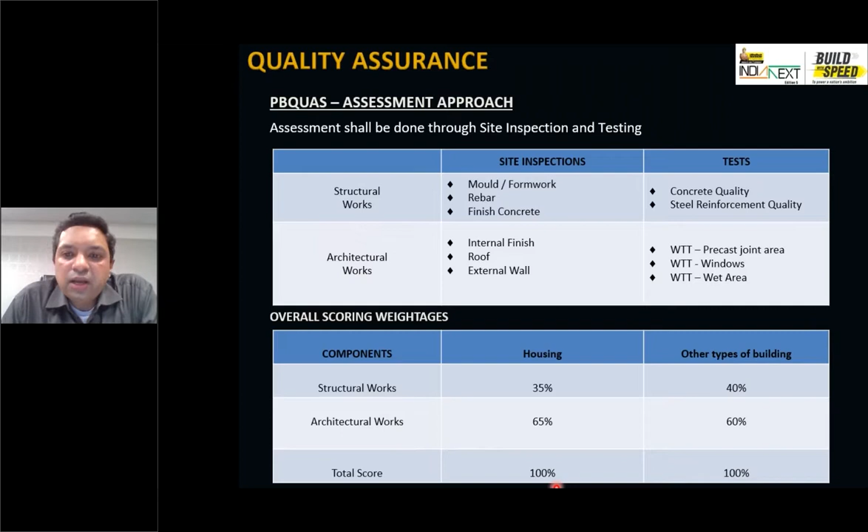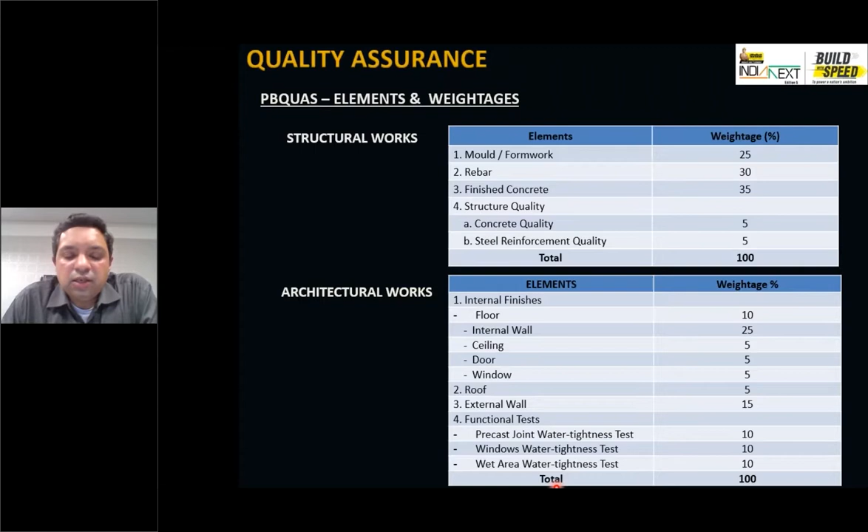But as a client, if you want to walk that Provident building, you're going to go there and I'm going to show you this is the finished flat, and it has a score of 84. When I build your building, I'm going to give you a score of 84 or more. Earlier we did not have that kind of database, now I have my benchmark set. You will get a building better than Provident, and we'll track it in terms of the scoring - that's how we are doing it.

Now coming to the last part of the presentation quickly, our ongoing work - this CIDCO housing project, what we are doing differently. Like I said, we are right at the inception of it, so maybe next time we'll do a better focused presentation on just the CIDCO job.

Looking at the value, this is one plot where we are doing about 7,400 units, about 1,500 crore more, total project, and about 66 buildings. We are doing about 25 currently. But when you look at the speed, this is how the plan is, or what we had planned in terms of our delivery.

So we are planned for about 30 floors per month. When the project peaks, every month, including all my cranes, I will be building 30 floors. That means 1 floor per day, which translates to about eight flats per day. That's the speed we are talking about.

How we'll build it - I have about 1.2 lakh concrete elements. Each element is about 4 tons or so, except the slab, and we'll be producing in the factory, shipping it to the site, and erecting. Imagine the coordination of about 1 lakh elements plus.

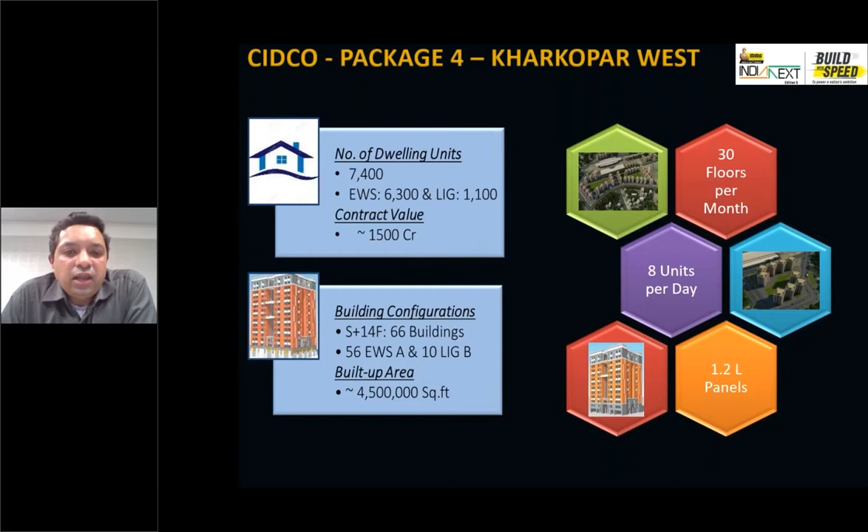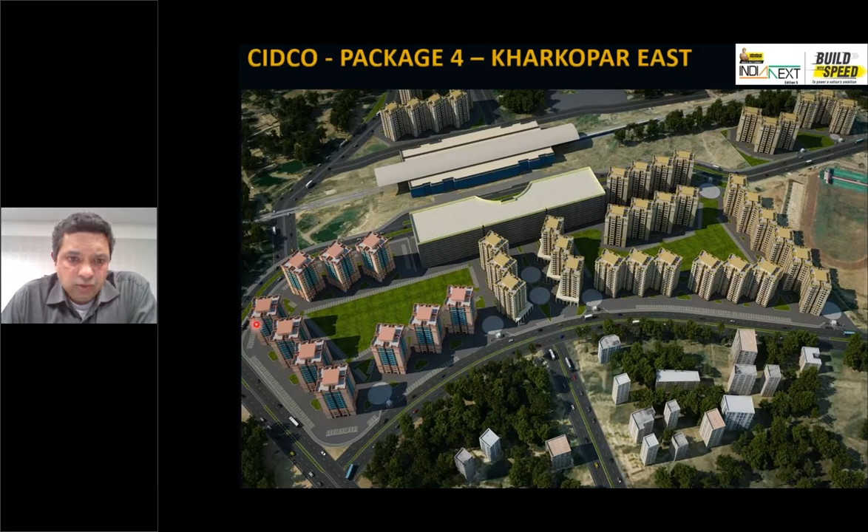These are some photos of the overall one plot that we'll be doing. There's another plot, then there's another scope somewhere else also. So these are the towers that we will be building. This work is ongoing now.

Now this comes to social housing, mass housing. This is CIDCO for the PMAY scheme, but the architect is Architect Hafeez Contractor. On day one, they were very clear saying, I don't want bland buildings - they have their own brand, I want my signature on that building. So we worked with them, sat with them on all the reveals, all the bands, whatever they had envisioned.

Some of them were distributed so that I can make sure the panels can be produced in the factory. This was the elevations that were planned using precast. When people say it has to have similarity, modularity - the bands are still there, I am still shifting the bands. We are doing that work, giving whatever is needed at the bottom, at the top floors, and still making this work using precast.

This is our factory now, the Mumbai factory. Like I said, Mumbai rains, so I cannot afford an open factory. So about 11,000 square meter factory, with a capacity of about 2.2 million square feet of built-up area per year, will be producing using this factory. If you want something relatable, about 180 panels per day is the capacity. At peak, we will be producing somewhere around 150 to 170 wall panels per day. Each flat, like I said, is about 15-16 elements.

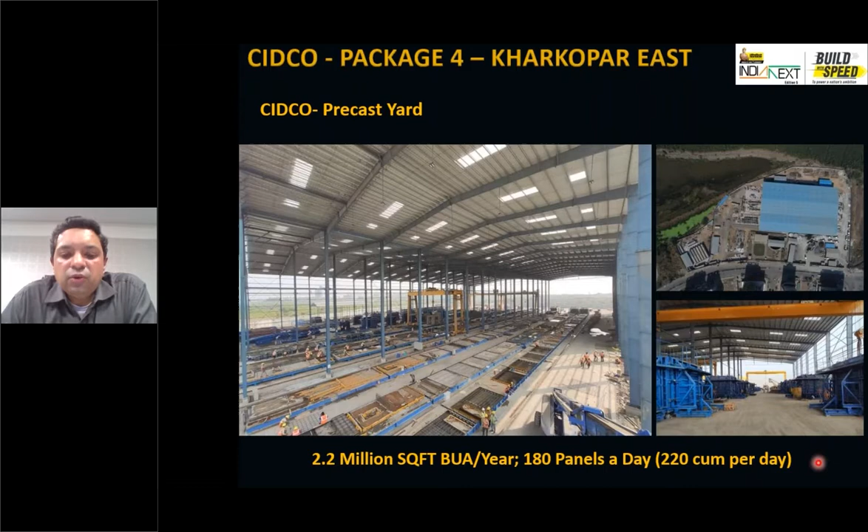So we are doing 10, 12 flats per day production in that factory. What we take pride in is most of these molds, whatever 3D, now we are moving towards PPVC. So we built 3D molds only for the bathrooms, but everything is built in India. Of course we have some molds coming from outside, but all these newer things we make indigenously, so we have better control.

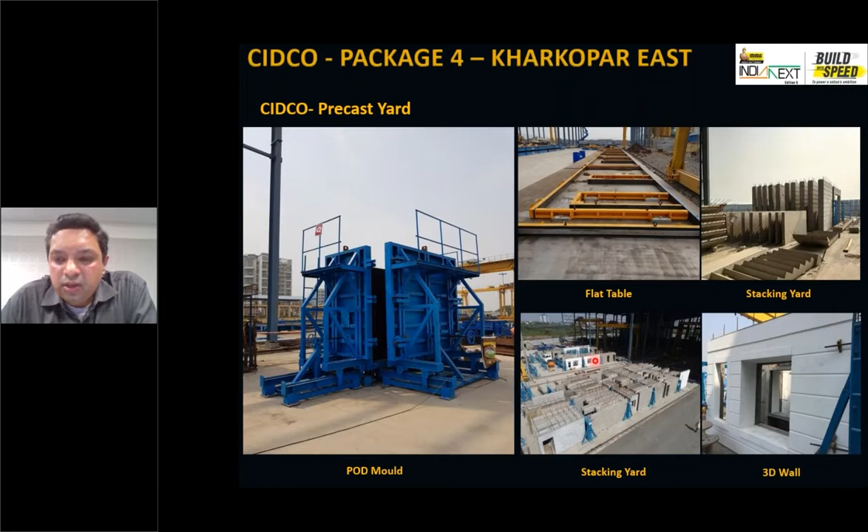If you see this wall, we are experimenting where the putty is done at factory, so I don't have to take that activity at site. Whatever I can do at factory, I want to do it at factory, finish it, keep the panel ready. On the day of erection, send it, erect it, and forget it.

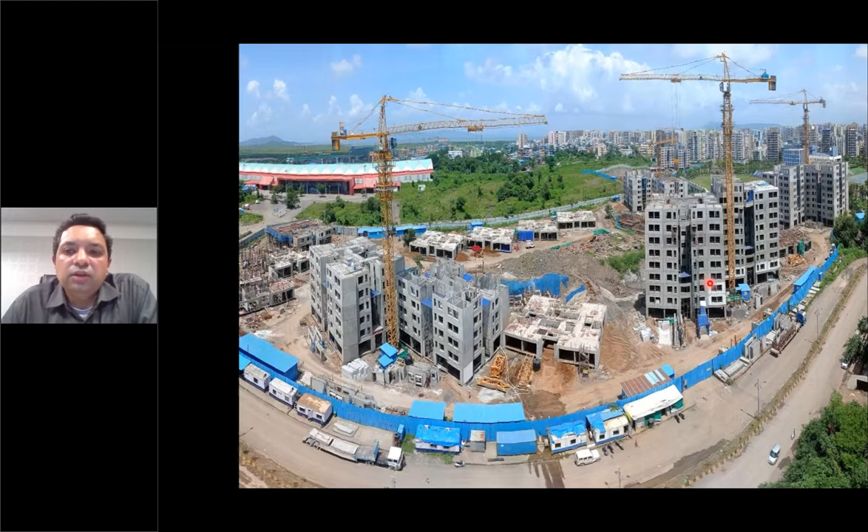This is probably a 2 month old picture of that whole plot going forward. In this entire plot, I have 5 tower cranes - 1, 2 here, 3 here, 4th here, and 5th. Work is going on. What you see is about 8 to 9 months when the picture was taken, and there is a 2.5 month COVID wave 2 delay built in here. So whatever you see is literally built in 6 to 7 months in front of our eyes.

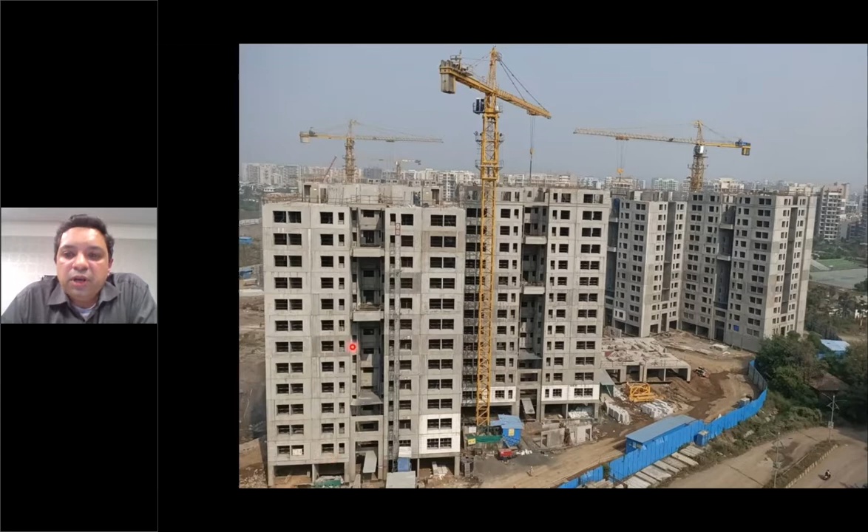So these are those finished buildings. Again, this will get finishing, painting, everything. Maybe in a couple of months we'll have finished pictures also. But like I said, if you avoid the COVID delays, this building has been made there in about 6 months. This is our first building, and it has been standing for about 6 months.

So now come back to the last portion of the presentation, and we are looking at that 1.2 lakh elements count. I told you maybe 180 elements shipped every day, erected every day. So if I have to track that project, my usual Excel day-to-day tracking is just not going to be enough - I can't track that kind. It has to have some kind of automation. So we said we are going to build digital solutions in place. Again, this is the need of the project. I'm not forcing the digital solution, I have to do it, I don't have any other way.

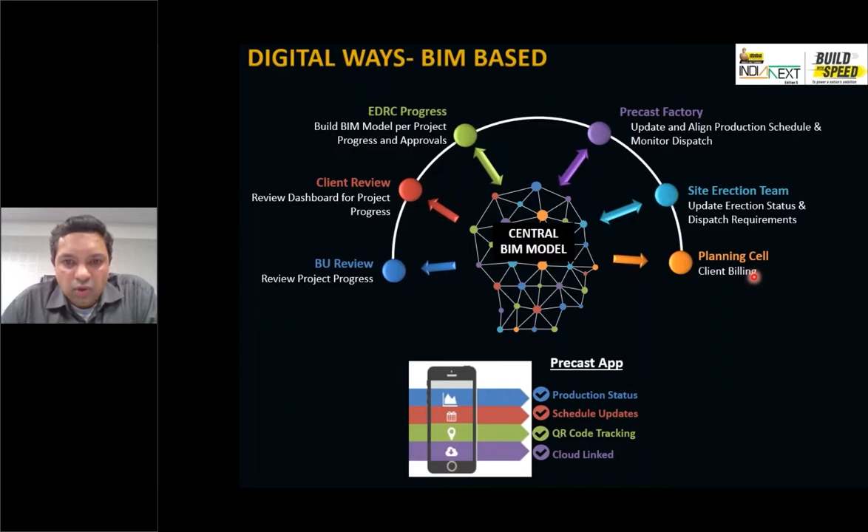So we anyway took it, the tender required BIM. So everything was done in BIM. That BIM was a central resource for all these agencies - this is what day-to-day coordination is needed. I sit in BU, I review that. Client is looking at that. Design team is looking at that. Factory wants it, site wants it, planning wants it. So we started with the BIM model, and all these drawings, everything is done in BIM.

So whatever you see in this picture is built in the BIM, including each rebar, each tie, whatever detailing, whatever accessories I have, the connection accessories, everything is in BIM. Once that model is done, this entire drawing is just at the click of a button, maybe another 15% of work for some dimensions, but the drawing is ready. Tomorrow I change this window size, that drawing is ready. That's where we are specifically taking the BIM advantage for precast. All my 2D shop drawings are prepared directly from BIM.

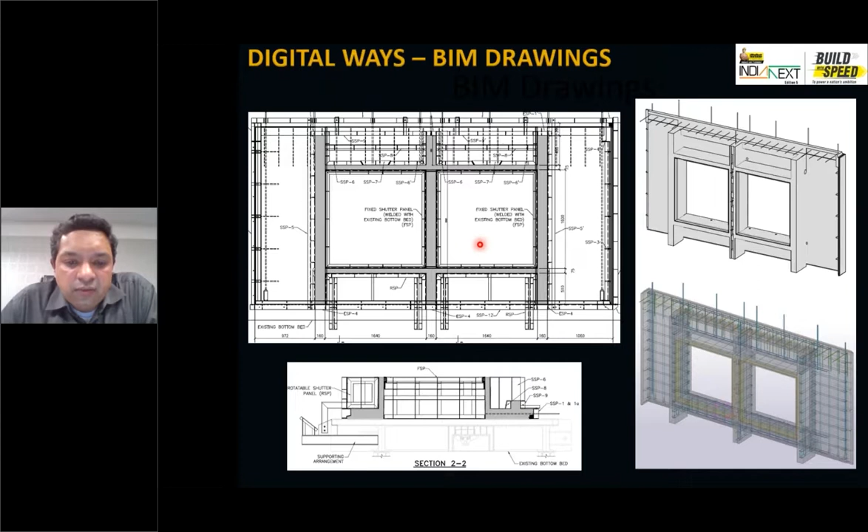Now once I have that, we built our own in-house app which will track all these elements. So that was my idea - to have each element tracked. This is still work in progress. We are probably going full-fledged in usage by next year, I mean this year March. But what that app is doing is tracking each element through its life cycle.

So when it was cast, using what concrete, when it was demolded, what was the strength at that time, who checked it, when it was sitting in the yard, who looked at the pre-delivery inspection, when it was picked up, sent to site. If you click that barcode, or we have the QR scan which can be scanned by any phone - once I scan it at any stage, yard or site, it's going to give me the entire history of that panel. That's how we are tracking these elements, in real time.

So imagine earlier it used to be where panels were erected maybe a day before. Then somebody comes next day morning, they put it in Excel saying these panels are there which were erected. Then by maybe next day afternoon, he's circulating the report, and somebody is looking at that and saying, oh, this is not right. Then it flags it.

By the time the site knows about it, 2 days are gone. Here the 8 p.m. panel is scanned and erected. I get that in the portal saying this panel shifts from this area to this area, status updated, real time, live. So that entire snapshot of the project, I'm going to see it real time. How many panels are to be produced, how many are produced, how many are sitting, how many are shipped, how many are finished.

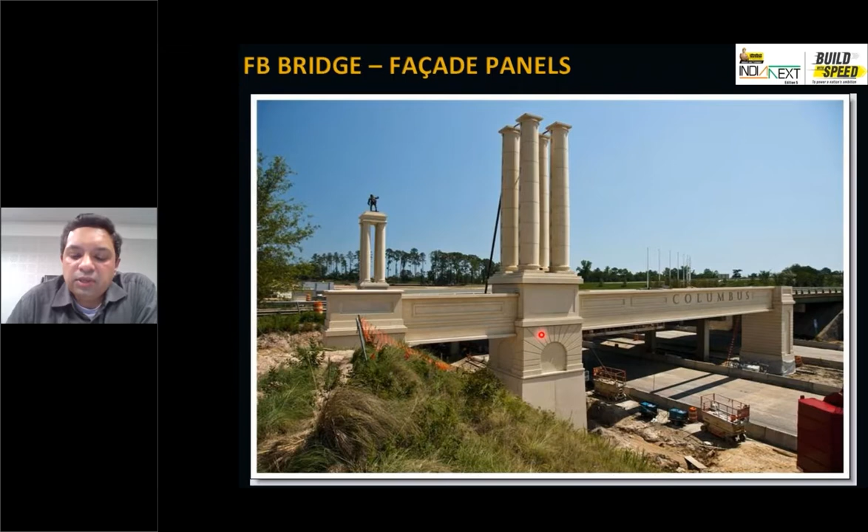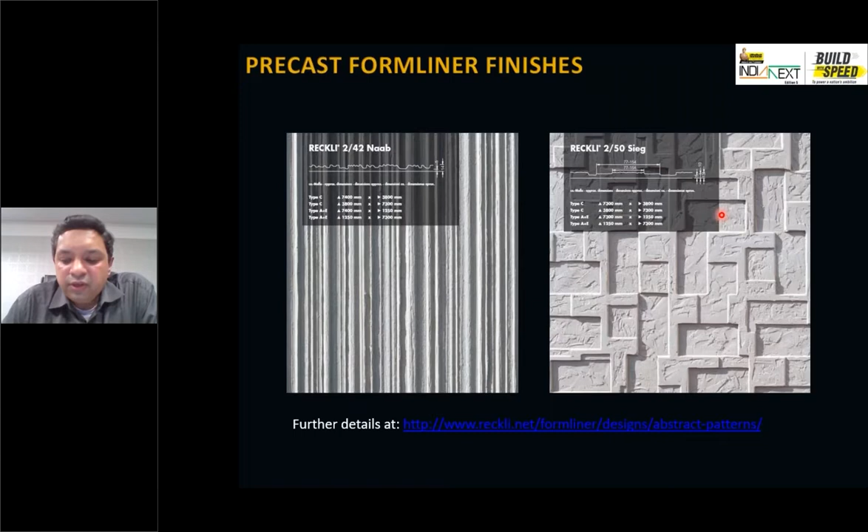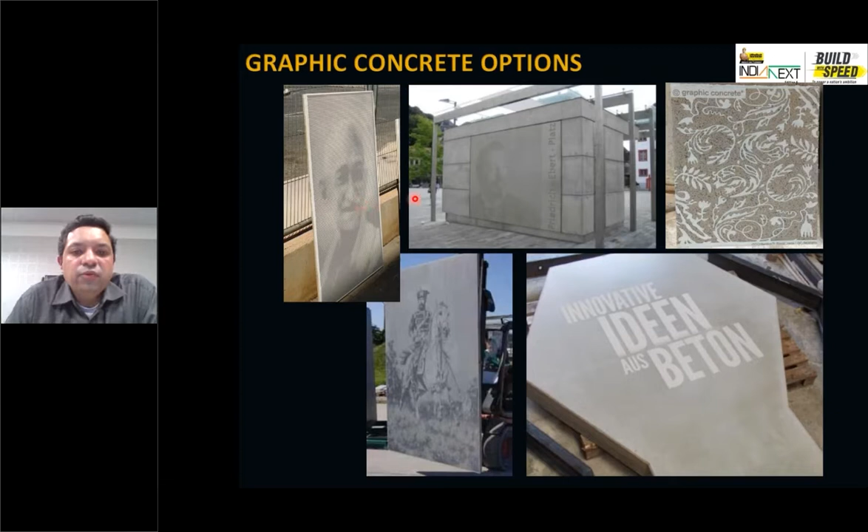We don't have to copy that, we don't have to mimic it, but we have to have that philosophy where our industry is also moving now, to take it offsite, finish it offsite, build and erect it. Some of these are niche products, but if you want to get into graphic concrete or something, these options are easily available in precast, which can be done. So with that, I thank you all.